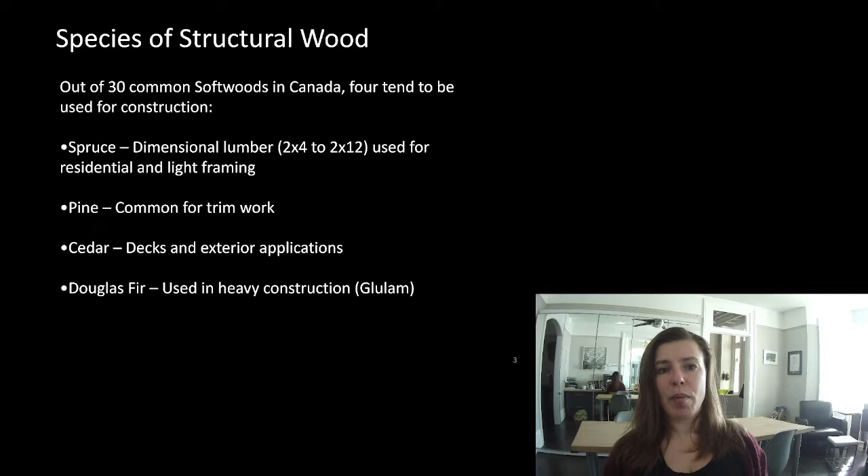We then, I'm going to add this to a wood properties chart I uploaded for you. Add other wood property. Actually, I'm going to pause this for just a second and come right back to you.

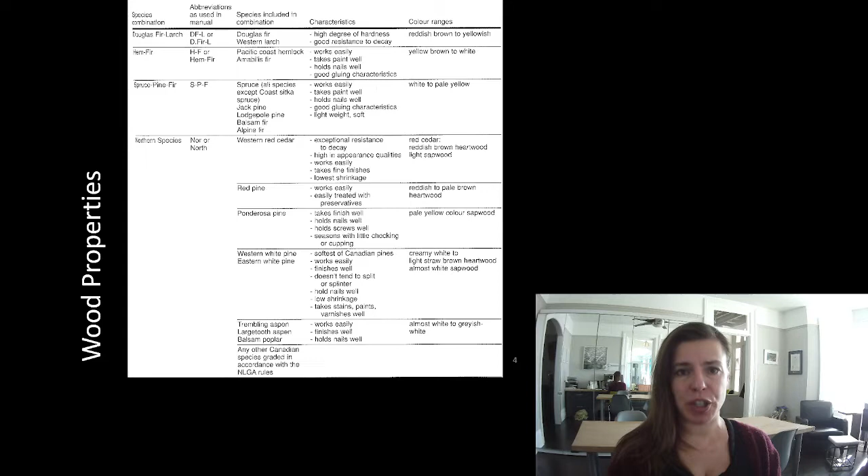Okay, so how do we group these pieces of wood? So you can imagine if there are 30 different softwoods that we can design with, keeping track of that is a big number. It still gets a little bit difficult because remember, I've already said wood is different in each direction, and now we've got 30 different types of wood that we commonly design with. So what they've done is they've broken them into sections of common types of wood. It's still a lot to work with, but it's a little bit better.

We have 4 different common groupings of wood. The first one is DFL, or Douglas fir larch. We have hem fir, spruce pine fir, or SPF, and northern species. So you'll often see nor or north.

SPF is the most common, the spruce pine fir. If you go into Home Depot and buy a 2x4, it's probably SPF. Unless you're building a deck and you're building it out of cedar. If so, it's a northern species, so cedar lumps into this category. Most other stuff lumps into this.

Hemlock, the only thing I've really designed with hemlock has been a dock. It behaves really well in a water situation, although I do know a couple architects working with hemlock right now. They're getting it directly from a mill, and they're doing it on some really cool interior spaces. The Douglas fir tends to be used in glulam.

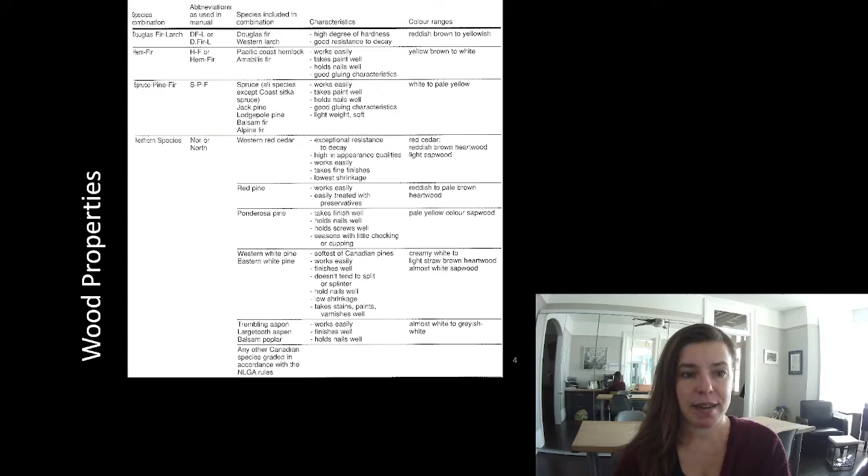Now, we're going to jump around with these a little bit because the process is the same that I'm about to show you. But for the most part, SPF is the most popular. Probably 95% of the construction material we use is going to be SPF.

If you look at a cross section of a tree, the outer bit is the bark, which is the protection of the tree - that dry, crusty stuff. Inside you have what's called the inner bark. You don't have to memorize this, it won't be on a test, but it helps you understand what's going on with trees and why we have certain design factors I'll show you in a little bit.

Springwood tends to be really fast growth, and in summerwood the tree slows down, then stops growing in fall and winter. That ends up creating very distinct rings in a tree. Most of you have heard you can count the age of a tree by its rings, and that's true - you can see a full year of growth quite easily on the interior of a tree.

The interior stuff, the heartwood, is the older growth, and this exterior growth is the sapwood. It's called sapwood because that's where the sap flows, bringing energy from the ground up to the leaves and vice versa - that's how it transfers things throughout its system.

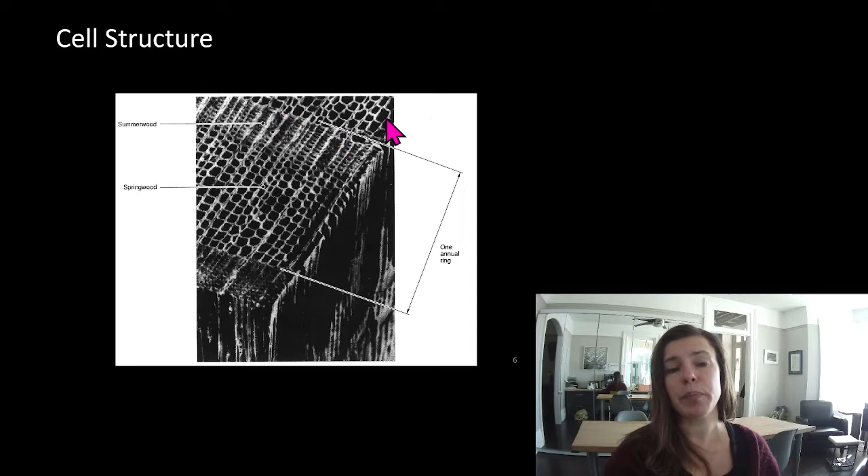So those are just some things to think about. In a few slides I will talk about the factors we use to design with wood. Before we jump into that, I just want to remind you what's available with wood - what materials are we using, what things are we talking about?

So, nominal or dimensional lumber - this was a slide I showed you guys last term. I know some of you in the advanced placement class didn't get the benefit of that, so this is hopefully a refresher. The idea is you should have a grasp of most of this.

Our 2x4s, 2x6s, 2x8s, 2x10s, 2x12s, and 4x4s are not full size. A 2x4 is not 2 inches by 4 inches - it's 1.5 inches by 3.5 inches, or in metric, 38 millimeters by 89 millimeters.

So yes, we will convert back and forth a little bit, because in Canada a lot of residential drawings still show up in imperial. I know we're a metric country, but that's a carryover that hasn't made its full change yet. And so a 2x10 is 1.5 inches by 9.25 inches.

We use these for joists and studs - that would tend to be your 2x4s and 2x6s for studs, and a 2x8, 2x10, maybe even a 2x12 as joists.

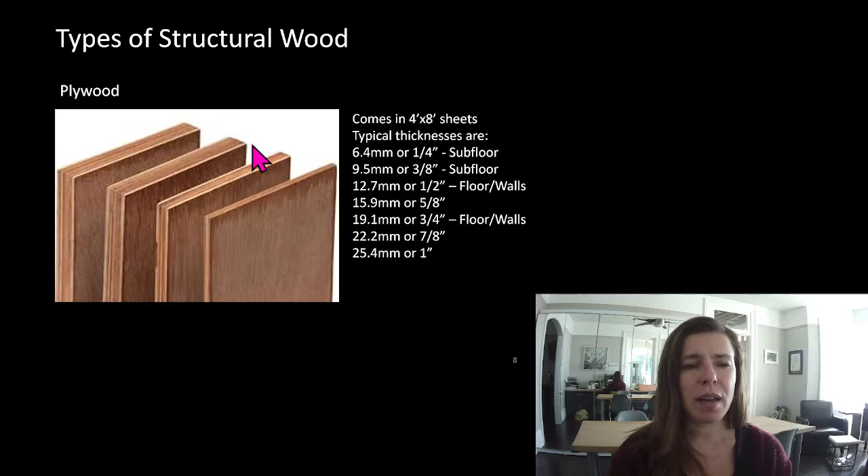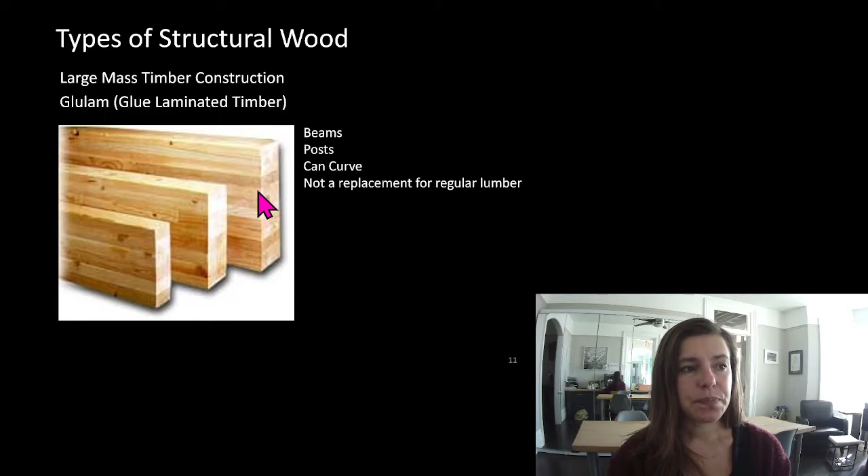I joists, we're not really going to get into designing these, but these would take the place of joists. Our PSL or LVL are engineered lumbers. We're not going to be doing anything with these right now, but I just wanted to remind you they exist. Last term, we talked about using these with sizing guidelines. And then we can have mass timber construction with glulam elements. And then everybody's favorite wood star right now is CLT, or cross-laminated timber.

Now again, this was just a quick refresher to remind you of these different types of wood. Mostly right now, we're going to be designing with nominal lumber—so that means the 2x4s to the 2x12s and 4x4s, maybe even a 6x6 thrown in there. Because the process is the same for the other types, and I need to go through one of them in detail. If we do all of them, I don't have time to do any of them in detail, so I prefer to teach you one rather comprehensively.

So what could make wood harder to design than steel? Well, it has moisture in it. We go cut down a tree and that sap oozes out of it. It shrinks—so even once it's dry, it tends to shrink somewhat. That's all of those long, skinny cells in it kind of shriveling up.

It's non-isotropic. Remember, isotropic means it's the same in every direction—non-isotropic means it's different in the different directions. Those same long, skinny cells—squashing them this way is different from squashing them this way.

It's imperfect—so we can have knots in our tree. Where a branch comes into the side of the trunk of the tree, we can have a flaw in our material there. Those checks and rays that we saw in the cross-section of the wood can also cause flaws in our piece of lumber.

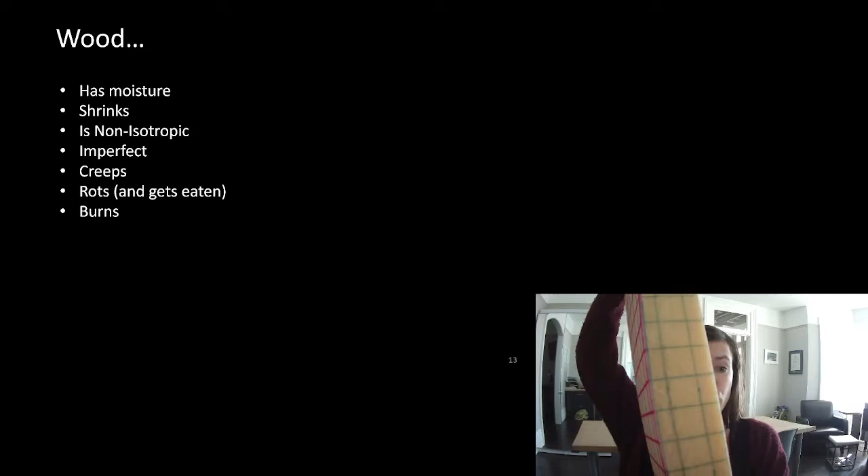Remember, with steel columns, we knew that if it was really short, it would squash. If it was really tall, it would buckle. If it was somewhere in between, it was some combination of squashing and buckling. Wood is the exact same—we have those exact same problems that we have to deal with.

But now we also have to deal with these other problems. So here's what we do: we create factors that we go through to determine the strength and the stiffness of the material we're designing with.

So the first thing we have to do is figure out what type of wood we're using. Then we have size factors—the size factor is about determining the odds of a flaw being inside our material. There are system effects: how are they behaving relative to each other? Load duration—this is about that creep factor. Service conditions—is it wet or dry, which means will it rot? Chemical preservation—treating it against moisture or fire retardant. And then we have the one factor we worried about with steel, which is lateral stability, or buckling.

Out of all of this list, we know all of this for steel—it was just 350 MPa steel. That was easy peasy, we didn't have to worry about more than that, and then we had to worry about buckling. Well, for wood, we have all of these factors that we have to add into it.

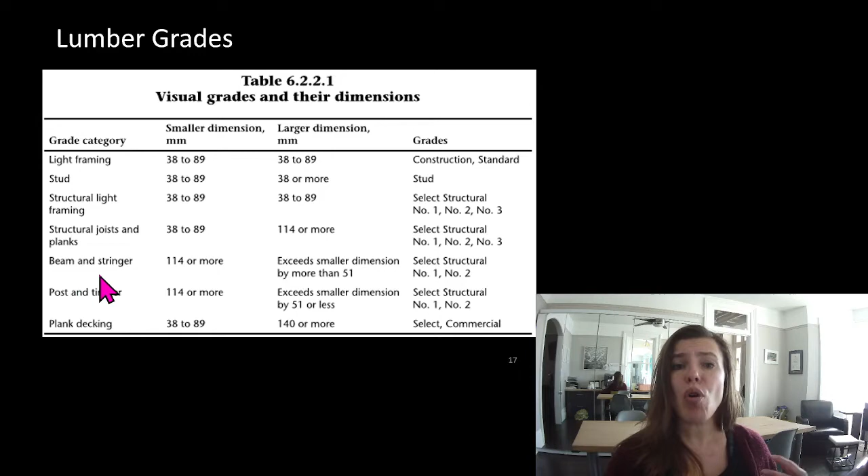With knowing this, we can figure out what grade category we have. Now, why do we need to know the grade category? Well, the grade category tells us what properties our material has - so these all have different load tables or property tables that are assigned to it.

So here's our very first one, table 6.3.1a: specified strengths and modulus of elasticity for structural joist and plank, structural light framing, and stud grade categories of lumber. So if we were any of those things on this table - stud, structural light framing, or structural joists and planks - we could use this table. Look at this: Douglas fir, hem fir, spruce pine fir or SPF, northern, which would be cedar. And then here we have our grade: select structural, number 1, number 2, number 1, number 3.

Look at this - bending at extreme fiber. Well, bending at extreme fiber means here and here. They're not talking about FY. Now, wood is brittle, so we don't have FY - this does not yield. So we care very much about what happens at this and this point in bending. If we start to fail here and here, the whole thing's done. It is a brittle failure.

So the extreme fibers, remember in a rectangle, we did that whole derivation of what happened to the stress profile. Well, if we hit that maximum load, if our extreme fibers exceed this stress, we got a problem. It's not going to work. Anything below this, we're good. We don't care if we are less than this. We care if we go over this. So if we're going to determine something, we might as well talk about it right at that limit.

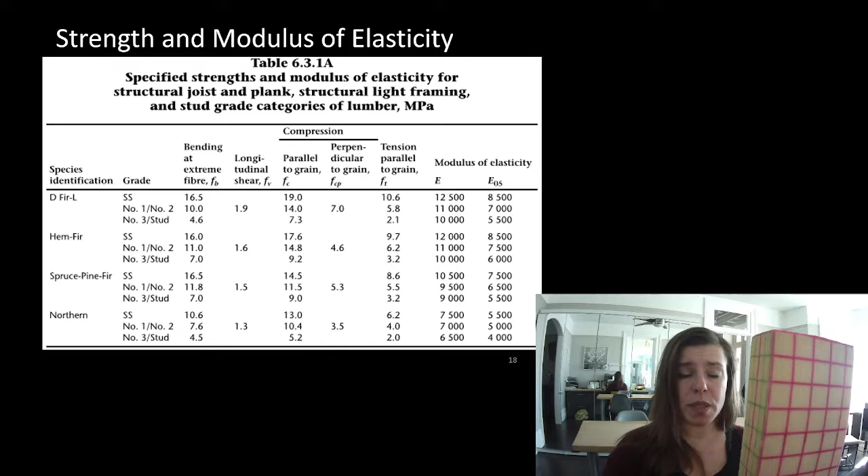But look at this, we have not just FB, we have compression parallel to the grain. Remember all of those tubes, or those straws if you wanted, those cell tubes? Imagine those are all running up the tree. Now we're going to cut it into pieces of wood and we're going to squash it. Our load is acting parallel to those tubes. Load perpendicular to grain is if we're trying to squash those tubes. Most of the time for columns, we're going to be talking about compression parallel to the grain.

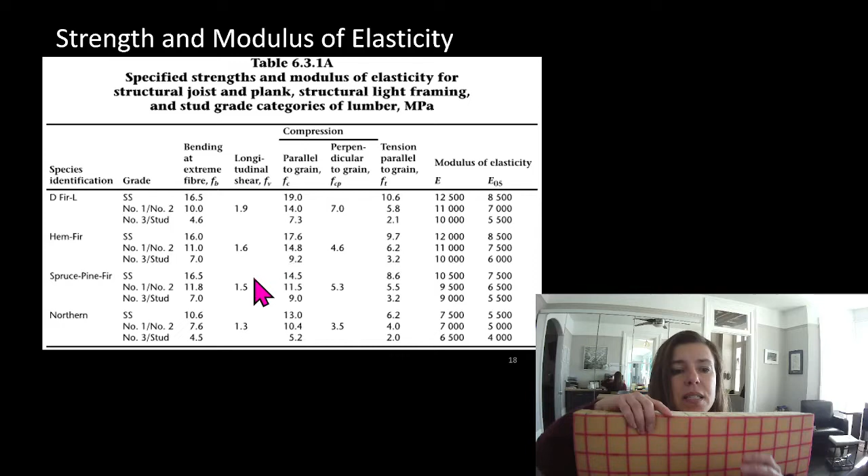And then look at this, longitudinal shear. So that is a shear trying to transfer along our plane here. So we have 3 different categories for our strength, or our maximum stress we want to see, broken out into different grades, broken out into different species.

For steel, we just had 350, maybe 345 if it was a hot rolled section, and that was the limit of it. We had one number we needed to worry about, whether it was in compression, whether it was in bending, or whether it was in shear. Already we have all of these. But wait, there's more, we have other grade categories.

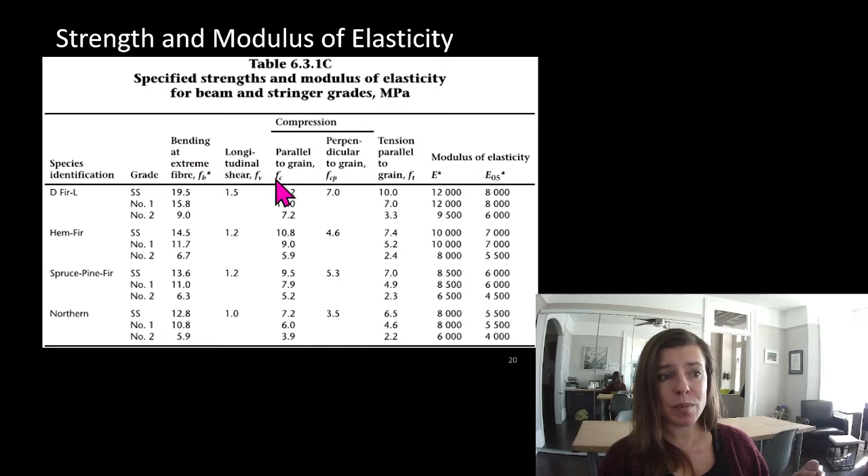This was just our first table. Don't worry about this one, we're not going to use table B. These are the ones that are machine graded. Let's go to the next one. This is the one for beam and stringer grades. Look, we've got all of our species identifications, our grades, and then we have all of our different maximum stresses we can see. And then we have table D, which is for post and timber grades.

So we went from having one grade for steel to having, God, how many? 3, 6, 9, 12, 24, 28 times 3. So almost 90 different strength possibilities for our wood.

They also list here modulus of elasticity, so we have E and E05. Don't worry about this, this is just talking about the 5th percentile of something occurring. Basically if we were talking about distribution and we bound it, we're going to cut out a portion of these values, so basically we build in a reduction to our modulus of elasticity. Imagine that there was another load factor that we already built in. Depending on whether we're talking about strength or compression, we use one of these two things. It'll be very clear when we look at the equations which one of these we need to pull out to do our work. So that's our strength and modulus of elasticity.

That's a lot of information, but we haven't even talked about our factors yet. We have more that we have to do here. So we would go figure out what our strength is, but then we need to modify it based on its specific condition. So that's what they go cut down in the woods that we can go buy at the store. But then what are we doing with this thing? That can have an impact on how we treat the strength as well.

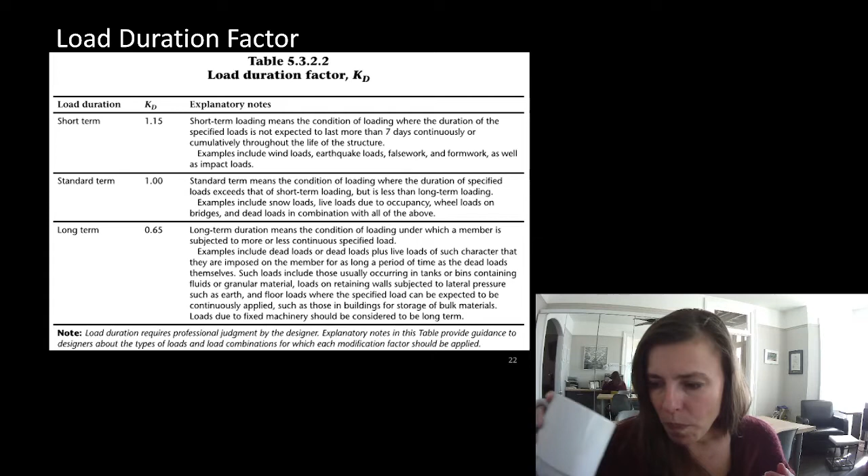So the first one is the load duration factor. The load duration factor says, well, this is basically accounting for creep. If something is sitting on this for a really, really long time, it can cause some creep on it, which can reduce its strength capacity. If it's a short-term load, like a really fast load, we actually get to say it's stronger than we typically would.

Now standard term is, you guessed it, going to be standard. I think I have one question on the assignment where you wouldn't use standard term. Everything else we do is going to be standard term. So unless you hear otherwise, always use 1 for KD. Just use 1. If you hear somebody say short term or long term, then come look at this table. But you would very distinctly have those trigger words from me, you would hear me write or say short term or long term. So standard term means the condition of loading where the duration of specified loads exceeds that of short-term loading but is less than long-term loading.

Yeah, what an obvious statement. Examples include snow load, live loads due to... oh, Jesus.

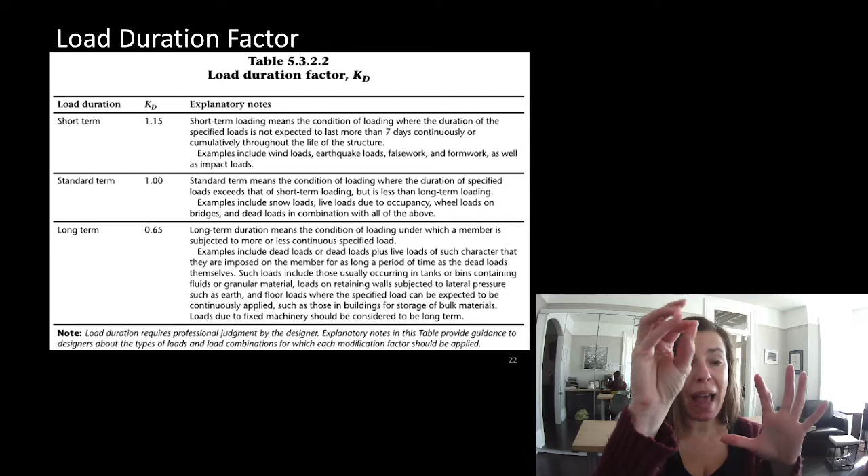We have the kids' bath toys in a basket attached to the side of the shower with a suction cup, and it just came crashing down. I'm in the house for the first time by myself in forever, so that really caught me off guard. I apologize, that startled me.

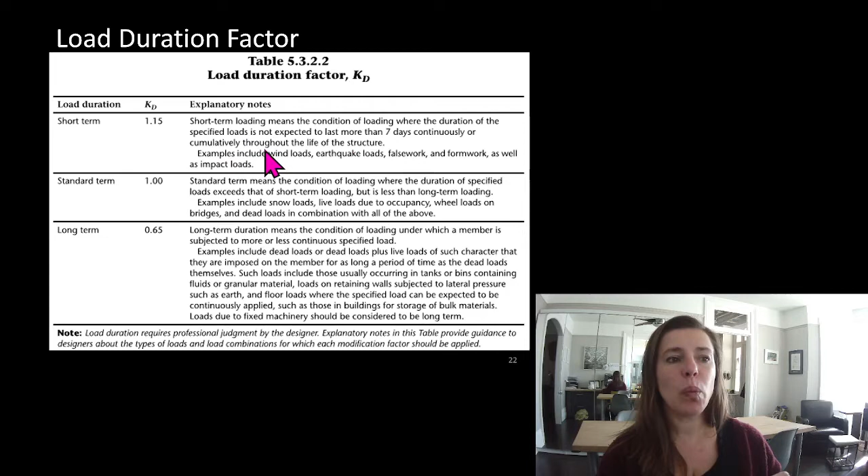Jiminy Cricket, okay. So, snow loads, live loads due to occupancy, wheel loads, and dead loads when combined with something else - if a dead load is combined with these, which is most of the time. One of the interesting ones is wind. Wind and earthquake are considered short-term loads, but most of the time for wood construction, we're talking about live load and snow load.

System factor - this one, for whatever reason, always screws people up: if it's not part of a system, people try to use 0. Don't do that. If it's not part of a system, its factor is 1. What this says is if it's part of a system, we can say it's stronger than we think. So what does being part of a system mean? Essentially, if we have things close together that have the potential to share the load, any one object is getting the benefit of the things adjacent to it.

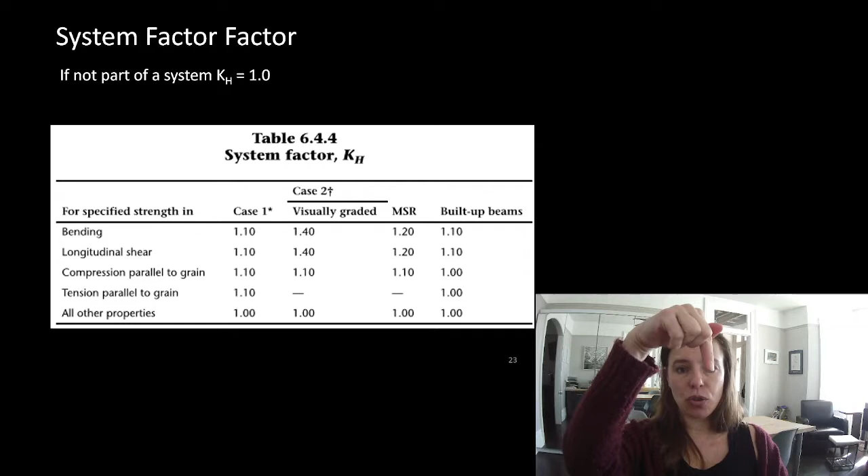So imagine you're building a deck and you don't have the top of the deck on, but you have all of your joists on it, and you stand in the middle of one of those joists. All of your load is going to go on that one joist, right? Well, what if you get off and then put the decking across all of the joists? And now you go back and stand directly in the same spot, over one particular joist. All of your weight is on one joist, except you're standing on top of the decking.

If your weight pushes that joist down, it pulls the deck along with it. And for the deck to go down, it has to try to bring the joists beside it down just a tiny little bit. Meaning, by activating the middle joist, you're engaging the joists on either side of it by the fact that it's got the deck on it. And that is what accounts for a system. If it's a post or a beam, it's not part of a system and its factor is 1.

If it's a joist or a stud, it's probably part of a system. So those are your trigger words right there. Joist, stud - you can be pretty certain it's going to be part of a system. If it's a beam or a post, you can be pretty sure it's not going to be part of a system. Now, there are very specific clauses for when it's case 1 and case 2. I'm going to tell you that most of the stuff we do is going to be case 2. A normal house, which is a normal thing, would be case 2, just the way they build things.

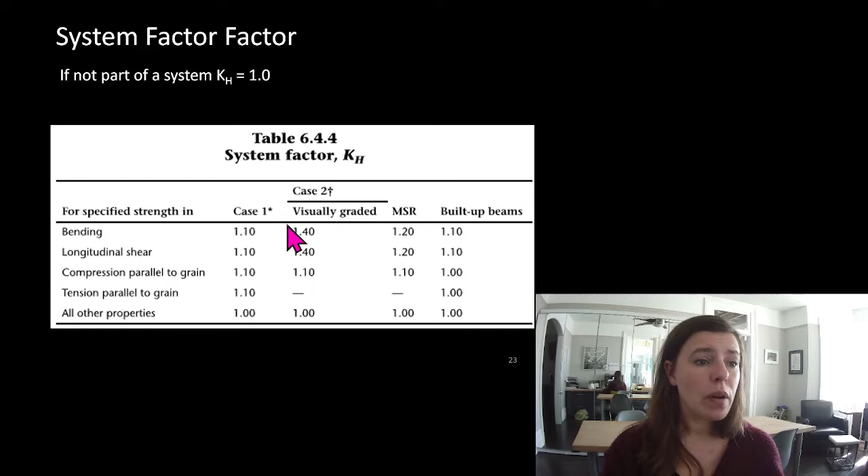So they say here, joists and rafters sheathed with plywood, a minimum of 9.5mm, with panel coverings - basically a normal floor construction. If we've got that, you can assume case 2. So if you see me say 'kind of a normal building,' you'll know I'm saying case 2. If you see stud or joist and normal construction, you'll know it's a case 2 system factor. So look at this, system factor: case 1, we're not really going to use that much unless I explicitly say it's case 1. Case 2, here are our system factors.

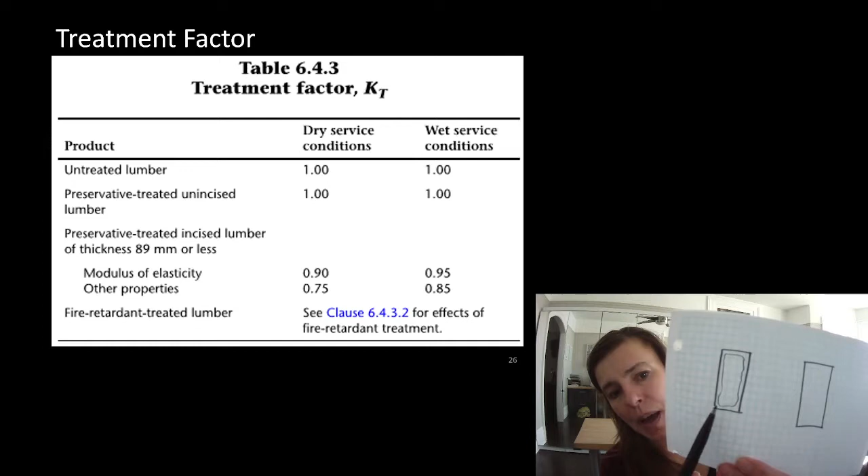If you've ever cut pressure treated lumber, it tends to have a color variation that looks like this. The outside is treated and the inside isn't. If you make a cut, we often buy a seal coat or end coat where you just brush it on the end to add some pressure or preservative to that end cut of our piece of lumber.

Incised lumber, they basically go around with, think of it as like a dimple maker for pasta or something like that. It basically punches little holes in the lumber, like that. So when it goes in the pressure treating bath, our pressure treatment goes a lot further into the lumber.

I have never seen a 2x4 or a 2x6 that's been incised ever. 2x8s, it seems to be whoever is the supplier. I've bought pressure treated 2x8s that are incised, and I've bought ones that aren't. 2x10s and 2x12s pressure treated are almost always incised, and you can tend to see them, it looks like they have staple marks all along the outside of them.

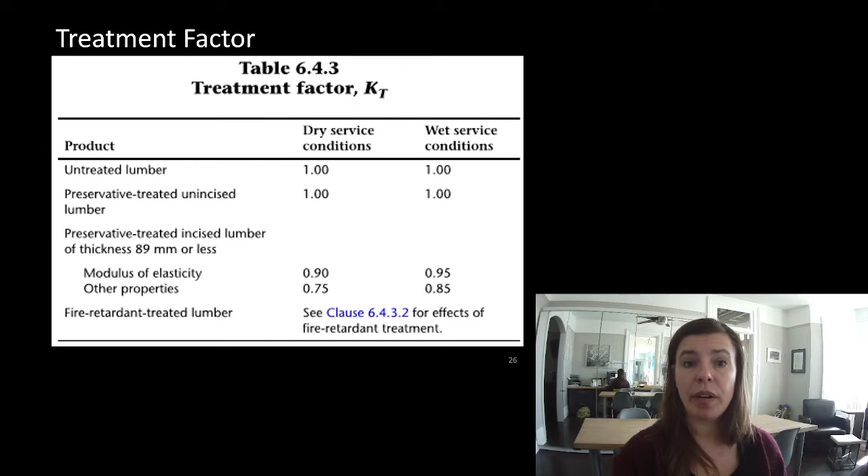Fire retardant treated lumber, there's a special clause here for that. I can tell you I have never done fire retardant on my lumber. I know Dave has been doing it for a lot of the mass timber projects they're working on now, but it would be a special class of building to be doing that.

Size factor. So the size factor, you would think that the smaller the lumber, the more you would reduce its size factor, or the more you'd reduce its strength. It's counterintuitive. It's the exact opposite.

The size factor tells us that, remember where we had the trunk and the branch coming in? Well, if we're cutting a small piece of lumber, remember we're grading these with our eyes. We look at the outside of it. We can't see what's happening inside. A small piece of lumber probably shows all of its flaws on the outside. If there's a knot inside of it, there's probably a portion of it that you can see on the outside.

As our piece of lumber gets bigger and bigger, the odds of there being a flaw hidden inside it actually increase. So if you have a member this big and a knot this big, you'd see it. It would be pretty obvious and it would be graded accordingly. If you have a member this big with a knot this big, it could be hiding right in the middle of the lumber and you wouldn't know. So as the size increases, we actually reduce the capacity.

For small members, we're so confident that the flaws have been taken into account that if you've got a really good looking piece of lumber with no flaws on it, we say, you know what, we're actually going to bump up the strength on that. And so that's what our size factor is.

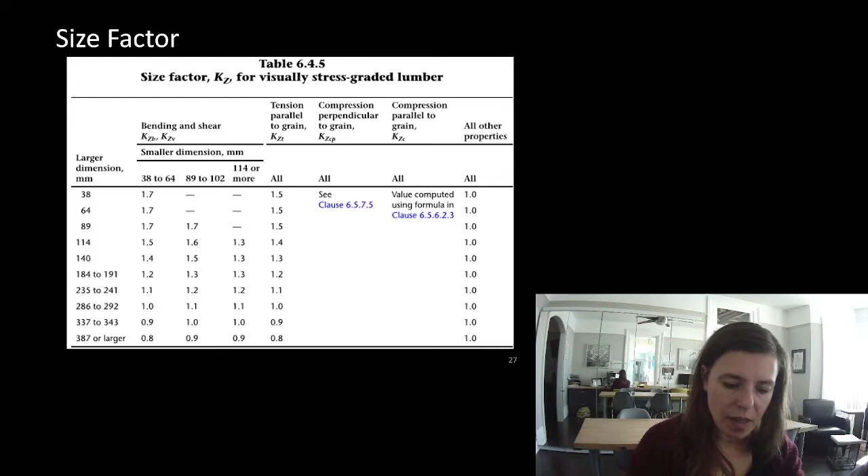Interestingly enough, for built-up sections, we get to use the size factor for individual members. So if we had these same two pieces of lumber, this would reduce its strength because it's one big thing and the knot could be hidden in here. But 4 pieces of wood screwed together, one big knot would be visible, and it already would have been accounted for in the fact that it was select structural versus number 1, number 2 versus number 3 versus stud. So built up sections, we can use the actual individual member size to determine our size factor.

All right, compression design. This equation doesn't look so bad. It's not scary. It's not as ugly as our steel one, right? We have our reduction factor here. Sorry.

We have our reduction factor of 0.8 for wood in compression, capital FC. They've given us an equation for this, with small fc and a bunch of our factors. Small fc is the specified strength or stress in compression parallel to the grain.

That's from those first tables we looked at, whether it was table A, C, or D. Remember, was it joists? Was it structural light framing? Was it post and timber?

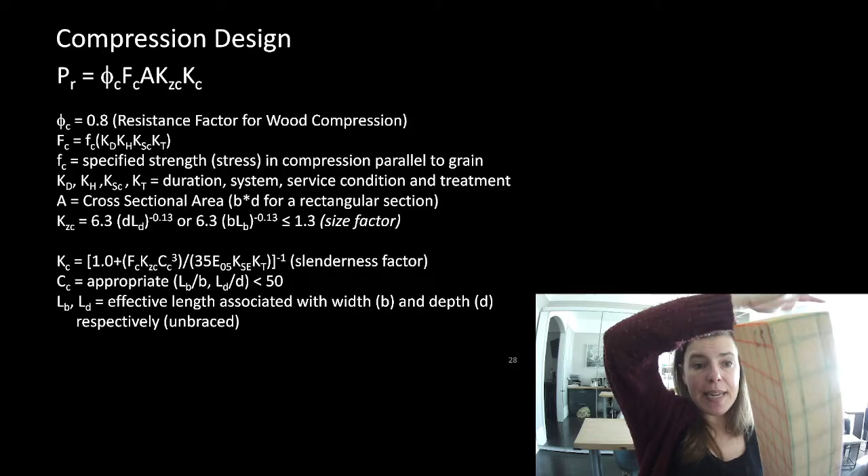So if we squashed it, it was pretty obvious that it was going to try to buckle in its weak axis. Remember, we were very worried about IYY for buckling, but IXX for strength, for bending, for stiffness, for deformation. Remember I showed you what happens if we just put our finger here - it changes our unbraced length to that dimension.

Well, wood is interestingly often embedded within other things - we often have plywood attached to it. So what we're saying here is we don't know what direction it's going to try to buckle, so we have to think about both directions. LB and LD are our effective lengths associated with each direction.

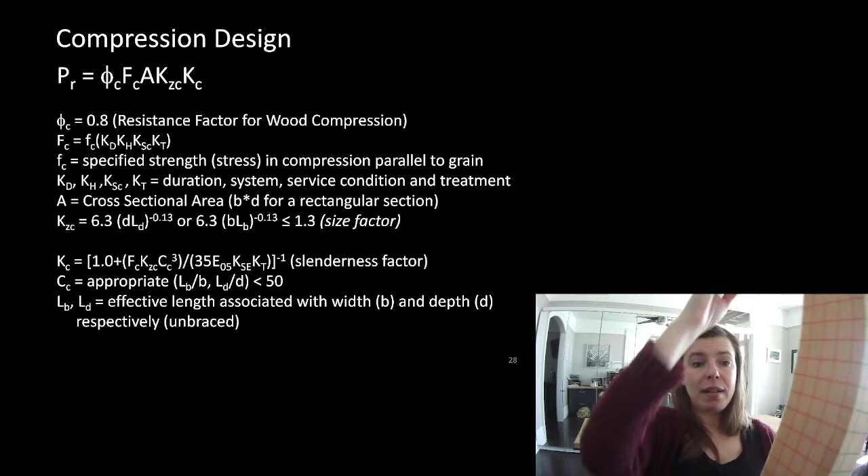So in this version, the unbraced length is the same for trying to buckle it in that direction or that direction, and you can tell at a glance that LB and B are going to govern it. But look at this - if I brace it here, we now know that its unbraced length is this in the strong direction, but half of that for the short direction. So it's probably still pretty obvious which way it's going to go.

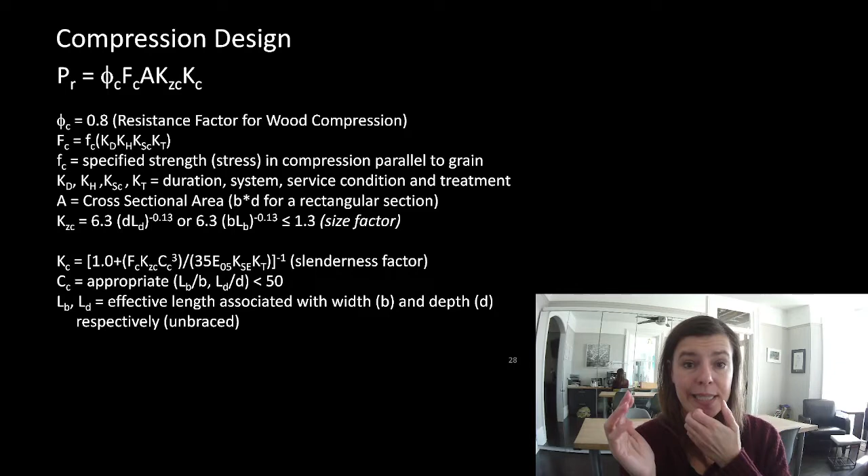What if I said this was in between something and it couldn't buckle at all in the weak axis? Well, we don't know when it'll try to buckle in that direction, but that's the direction it could try to buckle because it can't buckle in the weak axis. It might be governed by strength, but it might be governed by buckling in its strong direction.

So we have to think about its strength, buckling in the weak axis or buckling in the strong axis. That tells us which one to use, and then we use the appropriate size factor in that equation. So basically we're going to track two things. Sometimes it'll be obvious right away which one governs and we won't even need to bother with it, but most of the time we'll track both, and it'll become obvious as we look at some of these.

Let's look at the two different equations for steel and wood. For wood, it's PR, which is just another way of saying compression resistance. Why did they pick a different symbol? Who knows - the people doing the wood code weren't talking to the people doing the steel code, so they used different symbols for things.

The important thing is that they are very similar equations. It doesn't look like it, but look: they both have their reduction factor, they both have their cross-sectional area, and they both have the maximum stress we want to see in it for compression. For steel, it happens to be Fy because it's isotropic, but for wood, it's the compression parallel to the grain.

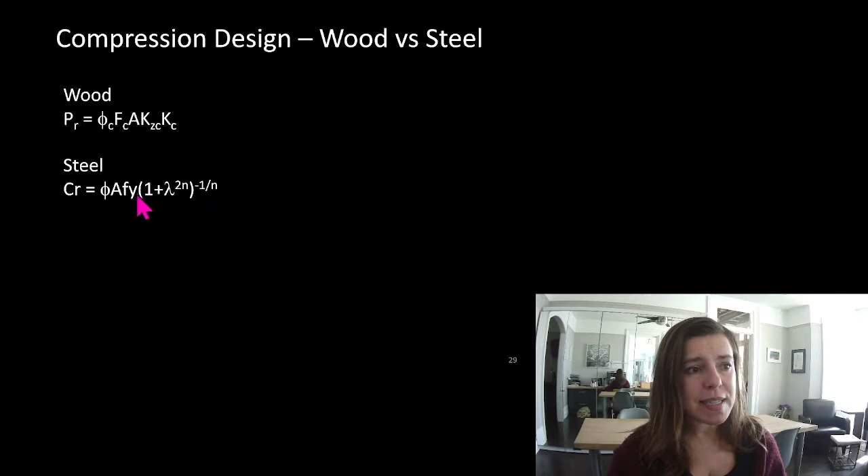We've built in some factors into this. Then we have KZC, which is just another factor, and KC, which is our buckling factor. KC, remember, was 1 plus a bunch of stuff to the power of negative 1, so KC is very similar to this portion. Really, what we're saying for both equations is we have a reduction factor, the maximum stress we want to see, our cross-sectional area, and then some factors for the material and for buckling. They are essentially the same equation - they just look a little different.

So we're going to follow the same process I always talk about, where we look at everything we know and see if we can solve each individual element of the equation before we plug everything in. Don't get overwhelmed by the big overall equation - stop and look at each individual thing within it, get as much information as you can, and then go back and try to solve it.

So let's look at how this plots out for a given element. Remember for our steel column, when it was really short it was governed completely by squashing, and when it was really tall it was governed completely by buckling - to the point that if it was tall enough, we said we don't even care how much capacity it has, we won't even let ourselves load it in that condition. In between those two extremes, it was some combination of squashing and buckling. Well, it's the exact same thing for wood.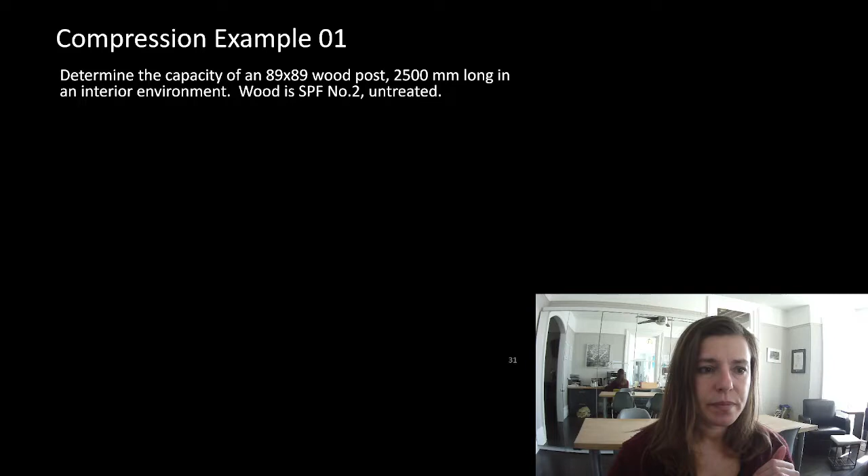Okay, the fun stuff. The very first example we're going to do is to determine the capacity of an 89 by 89 wood post. That's a 4x4 - remember, 4 inches by 4 inches is actually 3.5 inches by 3.5 inches. So we've got an 89 by 89 wood post, 2.5 meters long, in an interior environment.

So we can deduce some things from that, but we'll get to that in a minute. The wood is SPF number 2, untreated. So they're going into the store and they know they're just going to buy SPF because that's the most normal thing, especially inside a house. And it's untreated because why would you treat it - it's inside a house, we normally treat wood for outdoor conditions. Okay, so we want to figure out what the capacity of this member is.

So let's make this big. All right, so we want PR of - let's see if I can get this a little closer - PR of an 89 by 89 post, 2,500 millimeters tall.

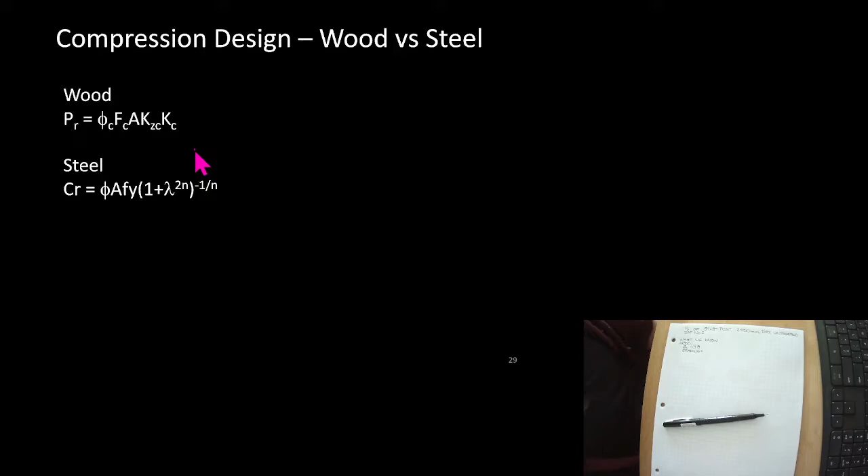Grading. We don't know what the grading is, we have to figure that out. So let's come down here. Let's go back to that table that had the grading in it. Okay, we want to know what grade category we are. Here are the different grades. So we know that we have number 2 lumber, so it can't be this, it can't be this. So it could be any of these. So we could come over here.

It's in this category here. The smaller dimension is 89 millimeters, so it could be either of these two categories. It's under 114, so it's not these ones, so it's gotta be one of these two things. The larger dimension was only 89 millimeters, it was square, so it can't be this. It looks like our grade category is structural light framing. So I'm just gonna write that in here.

So, structural light framing. Well, with structural light framing, we know we can get a bunch of information from a table, we just don't know what table. All right, we have structural light framing. Oh, look at this, structural light framing, we get to use table 6.3.1a. Well, we were told that we have SPF lumber, and it was a number 2. Okay, we know we're talking about something in compression parallel to the grain, so it looks like we can come over here and we can get a bit of information.

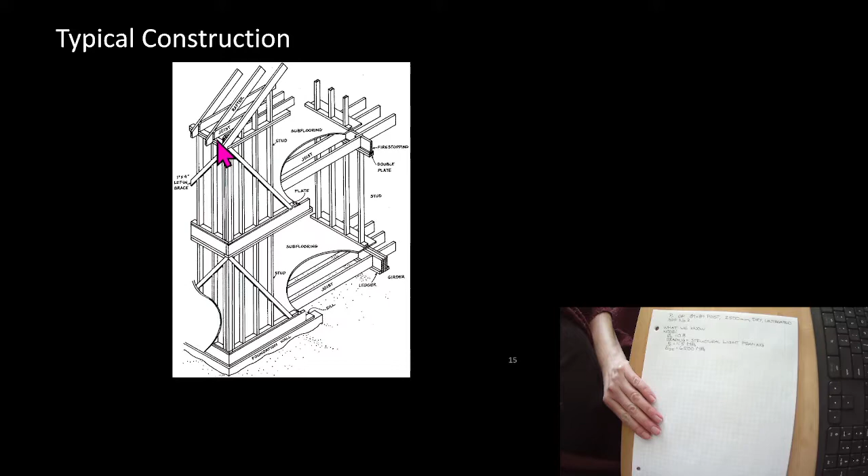Okay, well the first one, so these are our factors. KD. Well, they didn't tell us what loads were on it, but it said it was a pretty normal house. And remember I said, unless I told you something pretty specific, we're gonna be standard term. So standard term, KD, is 1.

That's nice and easy. All right, system factor. This said it was a post. When did I say right off the bat? You know what, I'm even gonna add this to slide 23. Post beam, I'm just gonna put a little note there for you guys just to really lock it in. So if it's a post, it's not part of a system because it's not sharing that load out with anything. So if it isn't part of a system, its KH is 1.

All right, let's go to our next factor. Service condition factor. We know there were a few things we could look at here, and we're talking about compression parallel to the grain, and we know we have a modulus of elasticity that we've pulled, so maybe we should get these two, so KSC and KSE. Let's see. Well, it said it was inside. To me, inside means it's dry, it's going to be protected from the elements, it's going to have an envelope around it. So everything is a factor of 1 if it's dry. So 1 and 1. Okay.

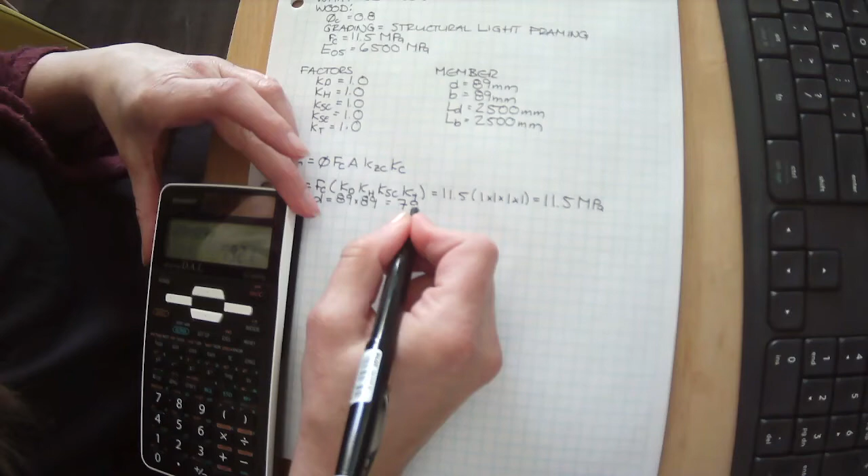This seems kind of boring so far, seems like we've done a lot of stuff but haven't really done anything at all. But now we have FC. Area, well we know area is B times D, so we can calculate that. 89 times 89, let's figure that out. 89 times 89 is 7,921 millimeters squared. Okay, we've got our area now.

KZC. KZC is ugly. KZC is a big old ugly equation that is 1 plus capital FC... oh sorry, never mind, I'm reading one step ahead here.

All right, KZC isn't so bad. KZC is 6.3 DL D to the minus 0.13, or 6.3 times BL B minus 0.13. Well we're only going to check this once because D and B are the same and LD and LB are the same. Remember, this is all about its propensity to buckle in either direction. So we would normally, if these dimensions varied, we would check both of these things, but for us it's the same.

It's 6.3 times 89 times 2500 to the power of minus 0.13. So 6.3 times bracket 89 times 2500 to the power of minus 0.13 equals 1.27. Now that is in fact less than... sorry, I'm kind of half talking to myself here. Yeah, it is less than our 1.3, so we're good, we've got a KZC here.

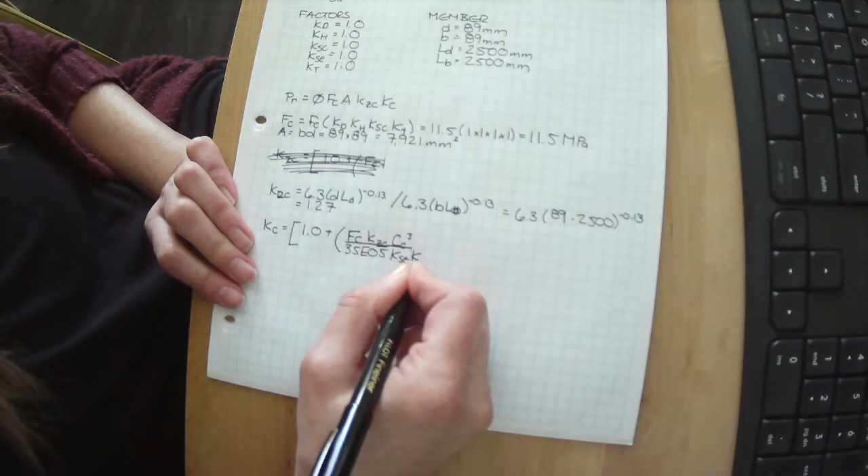Now KC is, big bracket, 1 plus capital FC KZC CC cubed, I always forget that cubed, try to remind me, yell at me, I'm going to forget that cubed, 35 EO5 KSE KT end bracket.

To the minus 1. Okay well capital FC we've already calculated, KZC we've calculated, EO5 we've pulled from a chart, KSE we looked from a chart, and KT. So the only thing we don't have is CC. All right, so CC is either LD divided by D or LB divided by B. Well it looks like these are the same, LD and LB are identical, and D and B are identical.

So we just need to do this once. 2,500 divided by 89. If you're wondering what do I do if these are different, don't worry, we're going to do another example that looks at that, I won't leave you high and dry on that. So 2,500 divided by 89, we get 28.09.

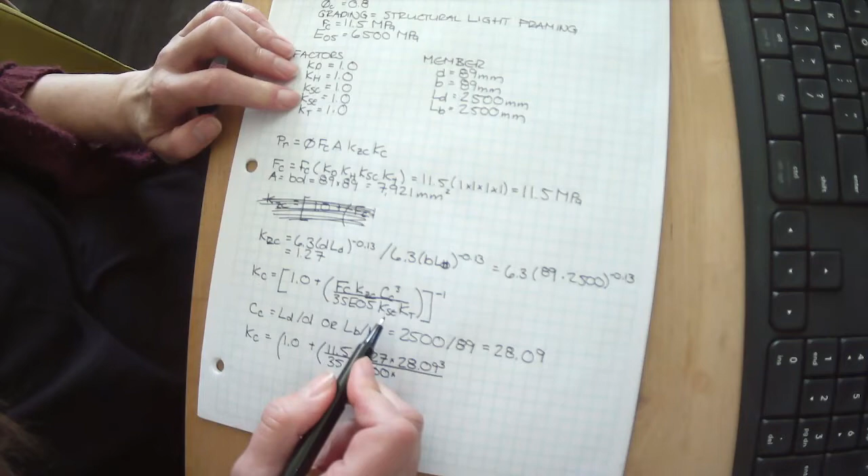That looks like it filled out everything for KC for us. Now we can calculate KC. KC equals 1 plus our FC we've calculated as 11.5 times KZC we calculated as 1.27, that's our size factor, times our CC cubed is 28.09 cubed over 35 times our EO5. Our EO5 we looked up is 6,500 times our service condition factor for stiffness, but it's 1, times our treatment factor, which is also 1. And then end bracket minus 1.

So let's plug this into our calculator. We have 1 plus 11.5 times 1.27 times 28.09 cubed divided by 35 times 6,500 times 1 times 1, end bracket, end bracket, end bracket, to the power of minus 1. And we get KC of 0.4127. Remember, this is our buckling factor. So this is telling us that if this was 1, it's not governed by buckling, if this was almost 0, it's entirely governed by buckling. But this looks like it's somewhere part strength, part buckling.

Okay, so now we have our KZC and our KC. It looks like we can calculate PR.

PR equals our reduction factor, which is 0.8, times our capital FC, which was 11.5, times our area, which was 7,921 millimeters squared, times our KZC, which was 1.27, times our buckling factor, which is 0.4127. All right, let's calculate this.

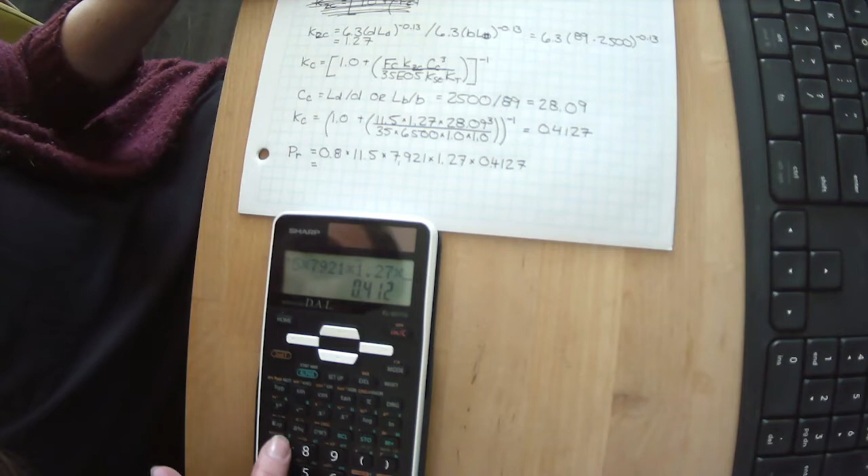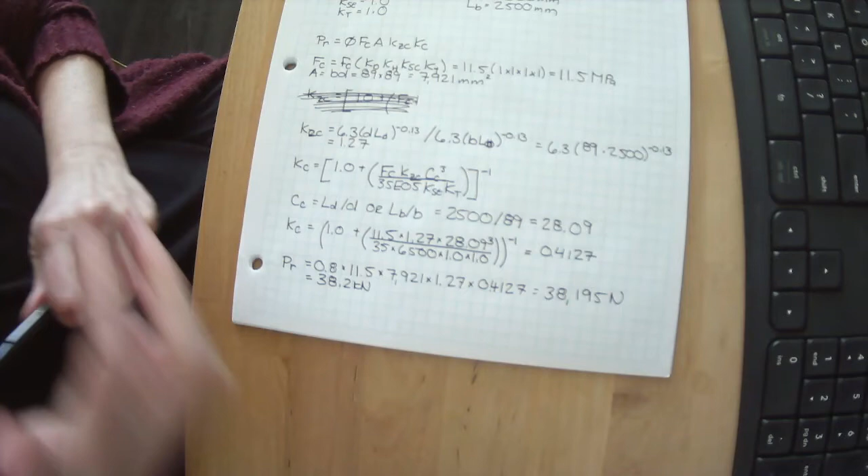We have 0.8 times 11.5 times 7,921 times 1.27 times 0.4127 equals 38,195 newtons. We find it a pain to talk about newtons once we're talking about the actual forces, so we're going to talk about it in kilonewtons now. It was useful to use newtons and millimeters for our calculation, but now we're going to say it's 38.2 kilonewtons. So whatever load is on that column has to be less than 38.2 kilonewtons.

We now know the capacity of an 89 by 89 post, or colloquially a 4x4 post, an SPF number 2, 4x4 post. That happens to be 2.5 meters tall inside a building. We don't know if this particular one works or not because we don't know what the load on it is.

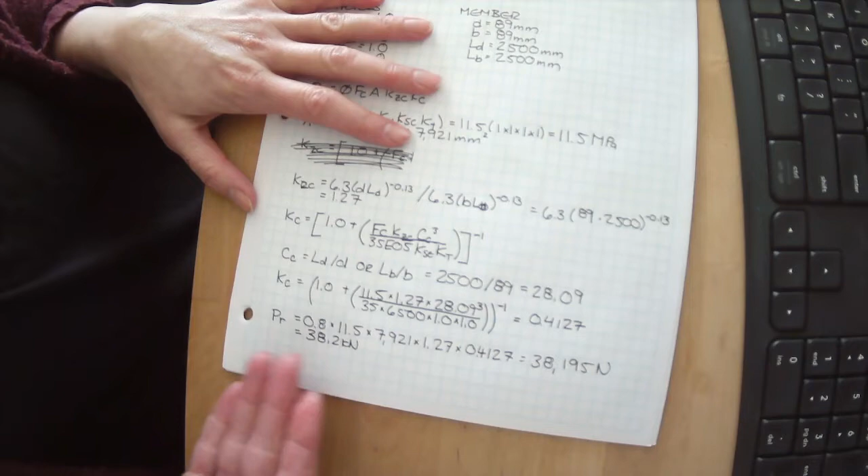Now, I am not completely evil, so I have also given you load charts. There are compression tables that I have provided for you. Let's open this up here first. Oh, where did that go? You little stinker. Here we are. We have posts here, and that talked about being on... sorry, let me get my bearings here.

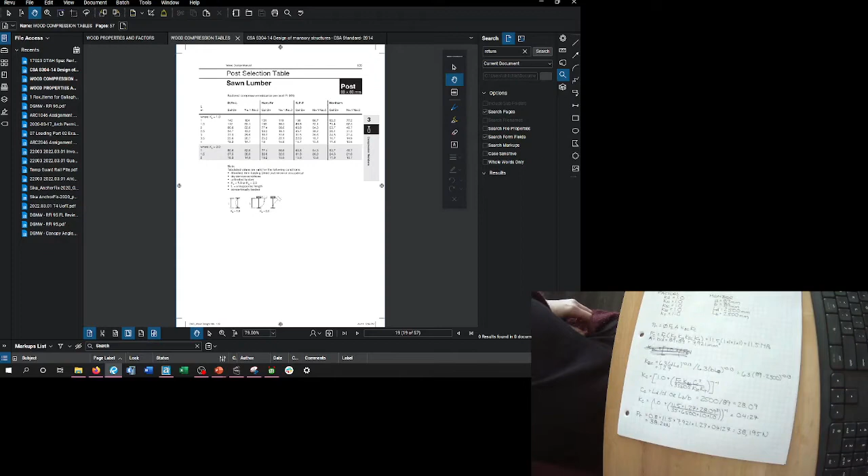So this is sawn lumber. Oh, look at this, post 89 by 89. The length where KE is 1. So basically that's talking about what does it look like when it's deformed. And we're saying that usually we've just got a normal old column that's got a floor above it and a floor below it that's kind of bracing it.

Okay, so where our length is 2.5 meters, and we have SPF number 1 or number 2, we come across SPF number 1, number 2, 38.2. That's exactly what we just calculated. So it looks like we did something right here. Go team. Okay, so here it is in that chart.

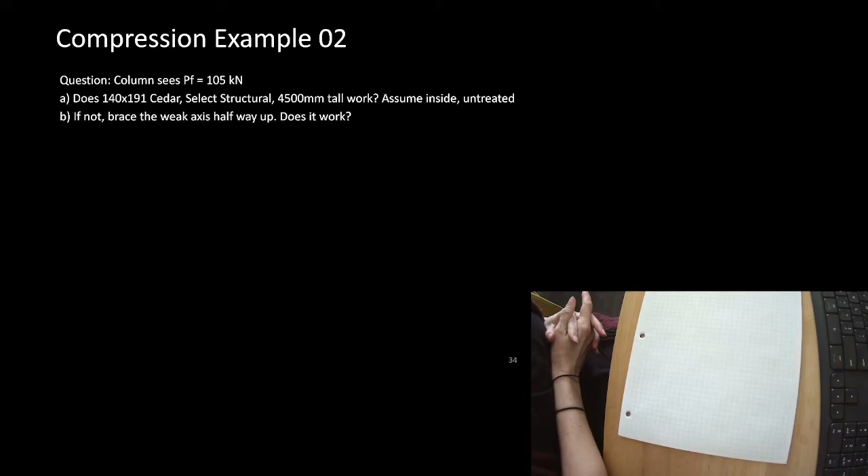Let's do another example. A column sees a PF of 105 kilonewtons. Does a 140 by 191 cedar select structural, 4.5 meters tall, work? Assume inside and untreated. This is one where we're going to look at two different bracing elements. If not, brace the weak axis halfway up. Does it work? Okay, let's take a look at what we know here.

PF equals 105 kilonewtons. We have a 140 by 191 cedar, select structural, 4,500 millimeters tall. It's inside, untreated, and unbraced. B, same as above, but weak axis braced halfway. All right, let's figure out what we know.

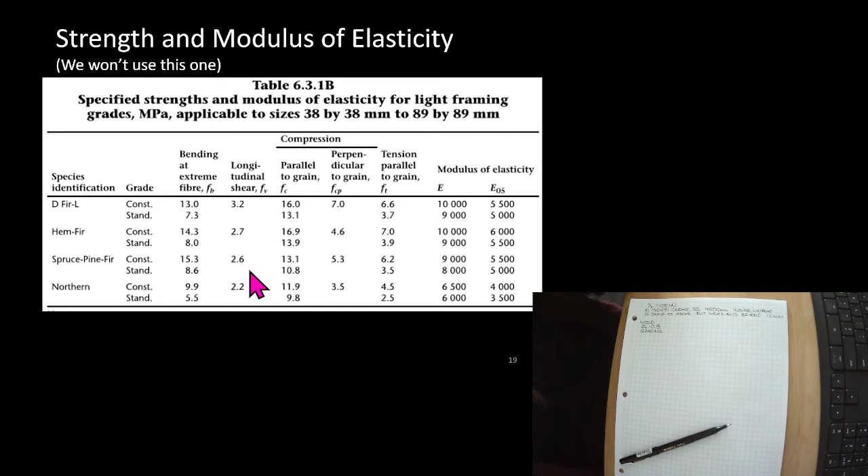We get to use the table that talks about post and timber. So let's look at that. Post and timber looks like it's table D. So 6.3.1D for specified strengths and modulus of elasticity. They told us it was cedar, so cedar is a northern species. It was select structural, they gave us this in the question. And we need to know what the compression parallel to grain is. It looks like it's 7.5 MPa. And EO5, which we know we need to help calculate our buckling, is 5,500 MPa. So 7.5 and 5,500.

All right, so it is post and timber. We have a lowercase fc of 7.5 MPa and EO5 of... was it 6,500? No, it wasn't 5,500... 5,500 MPa. Okay, now we know we have to think about those factors. All right, let's think about factors. KD, it didn't tell us it was anything unusual, so I think we're pretty safe to assume it's a standard term load factor.

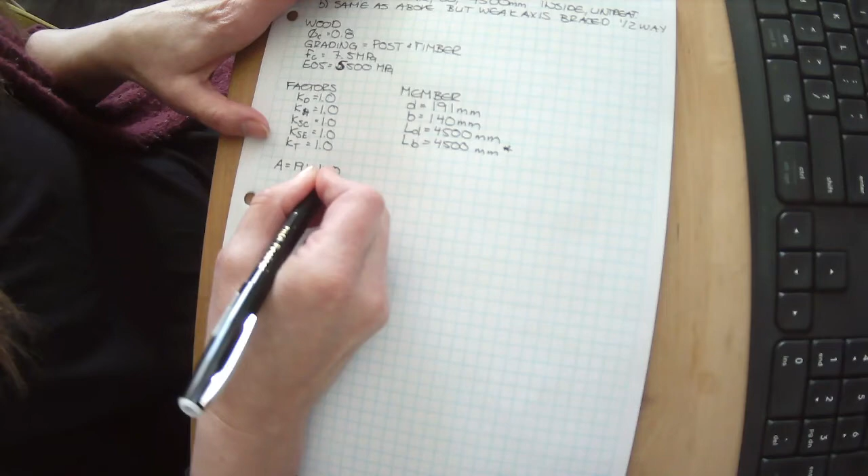All right, area equals 191 by 140. Area is 191 by 140, or 26,740 millimeters squared. All right. Capital FC is lowercase fc times KD times KH times KSC times KT.

Well, we have 7.5 times 1 times 1 times 1 times 1, or 7.5 MPa.

Let's right away calculate our CCD and our CCB. Well, they're not the same - remember last time they were the same? This time they are not the same. So we are going to track both of these. So for CCD, it is 191 divided by 4,500. And for CCB, it is 140 divided by 4,500.

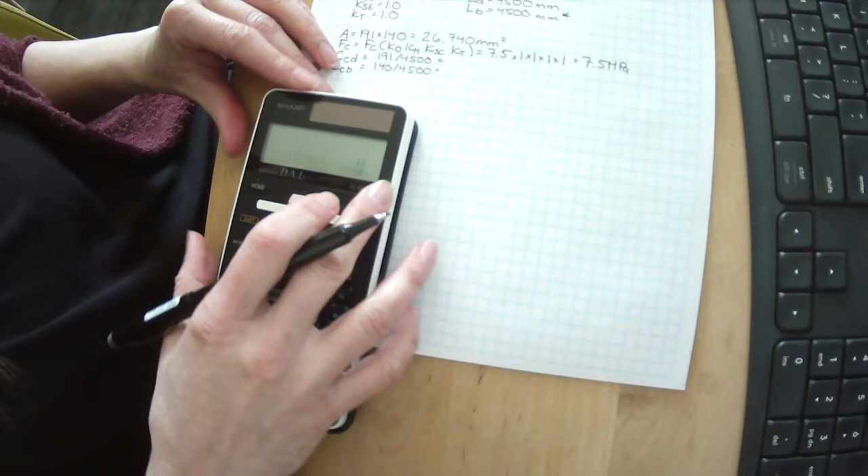But we don't know what the difference here means. So what we're going to do is continue to track both directions of failure here. Sorry, I wrote those backwards, don't mind me. So 4,500 divided by 191 and 4,500 divided by 140. 4,500 divided by 191 is 23.56, and 4,500 divided by 140 is 32.14.

We don't know what the heck that means, that doesn't really give us any information. So now let's calculate our KZC - for D, and KZC for B. Remember, it's 6.3 times 191 divided by 4,500, and that is to the power of minus 0.13. And we have 6.3 times 140 divided by 4,500 to the power of minus 0.13.

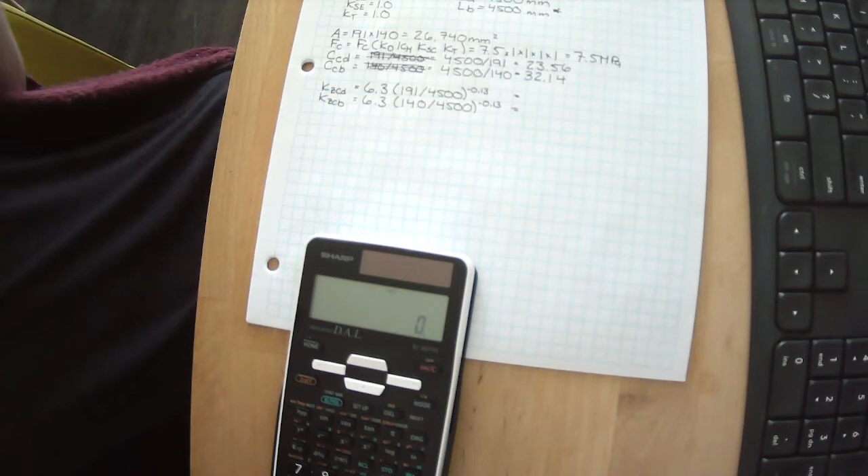So right now we're just tracking both of these things because we don't know which direction is going to govern. Now, you probably have a good guess - if the length is the same for both of these, do you think it's going to buckle in the weak axis or the strong axis? Yeah, my guess is the weak axis is going to be what buckles here.

Okay, so 6.3 times 191 divided by 4,500 to the power of minus 0.13 is - I am not plugging things in strongly into my calculator today, am I? 6.3 times 191 divided by 4,500 to the power of minus 0.13.

Oh guys, I am totally sorry, I don't know what I'm doing here today. I am just totally - oh my God, I did it again, I divided when I should be multiplying. I am really so sorry about what my brain is doing today. Oh, okay, those are big multiplications, not divisions. I don't know - luckily I know that the answers don't look right because I know these should be somewhere around 1.

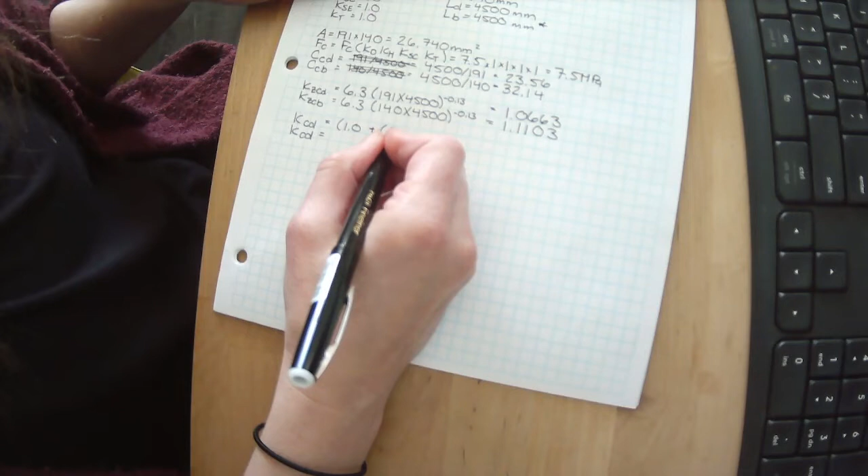So here we have 1 plus our FC, our capital FC is 7.5, times our KZC, and so this one's for D, so it's 1.0663, times our CC cubed, and this is for D, so 23.56 cubed, divided by - why am I doing this in such a messy way? This is really annoying to you guys and to me. All right.

KCD, that was - I didn't like that, sorry. So 1 plus 7.5 times 1.0663 times 23.56 cubed, I always forget that cubed, divided by 35 times our E05, which is 5,500, times our KSE, which is 1, times our treatment factor KT, which is 1, and all of this is to the minus 1.

All right, we need to calculate this for KCB as well, right? We're checking it in both directions, just to be thorough. We're pretty sure it's going to buckle in the weak axis, but we're tracking both of them just in case.

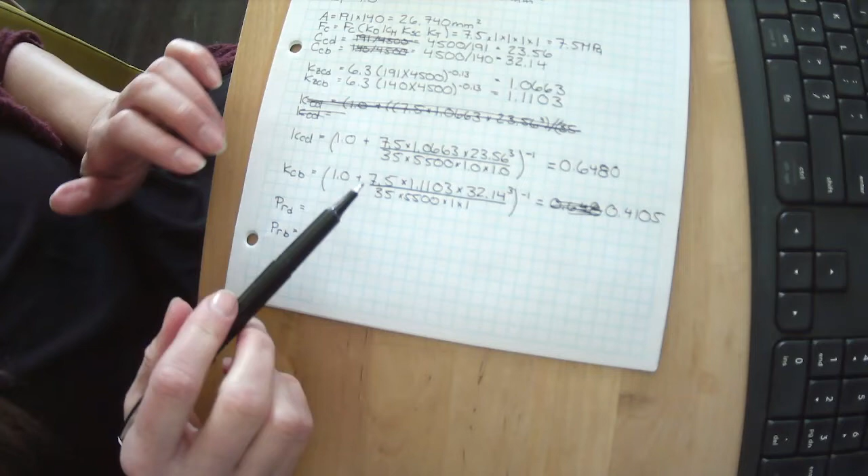All right, so our overall calculation for PR is our reduction factor, which is 0.8, times our FC, our capital FC, which is 7.5, times our area, which we calculated is 26,740, times our size factor, which is 1.0663, times our buckling factor, which is 0.6480. And then in our weak axis, our reduction factor is the same, our strength's the same, our area is the same, our size factor is different, and our slenderness factor is different, or our buckling factor.

So let's take a look at what our PR is. So see, it's not obvious. This is lower, but this is higher. So it's worth calculating both.

Times 7.5 times 26,740 times 1.0663 times 0.648. We get, I'm going to divide it, this is in newtons, I'm going to divide it by 1,000 right now to get it in kilonewtons. We get 110.9 kilonewtons.

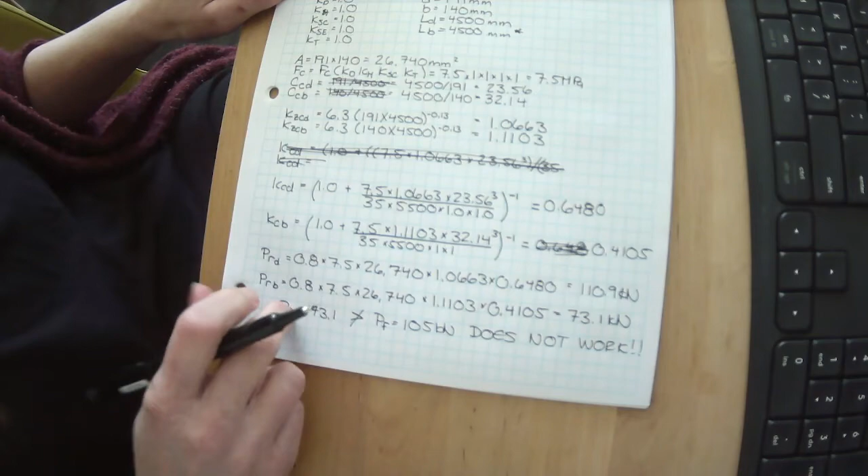Now, they said if it didn't work, they had a feeling this might be the case, but let's brace that axis halfway up. So for our strong axes, everything stays the same. Nothing changes in our strong axes. We've already calculated it, so that we've already got. We want to figure out what PRB is if we change it up a little bit. So for PRB, or our capacity in the weak axis for tendency to buckle, B still equals 140 millimeters.

But LB, it said we're going to brace it halfway up. So we've got a shorter unbraced length now. So what happens if we've got an unbraced length? Well, our size factor changes.

So we can calculate, well, actually a few things change. Our CCB changes, our KZCB changes, and our KCB changes, which means our PRB changes. I know, that was a lot. I know it sounds ridiculous when I just say all of those letters. Well, let's calculate our CCB.

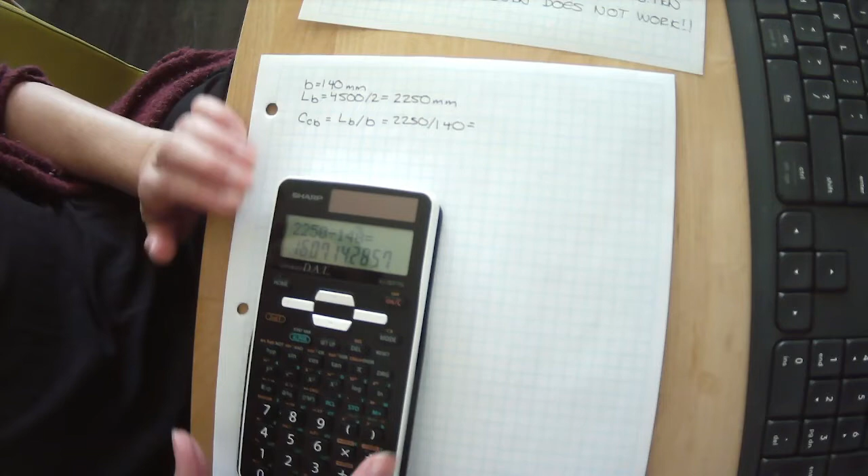CCB is our LB divided by our B, or 2,250 divided by 140. We get 16.07.

KZCB is 6.3 times B times LB to the minus 0.13, or 6.3 times our 140 times 2,250 to the minus 0.13. So 6.3 times 140 times 2,250 to the power of minus 0.13. We get 1.215. It is less than 1.3, so we're good. We can use that value.

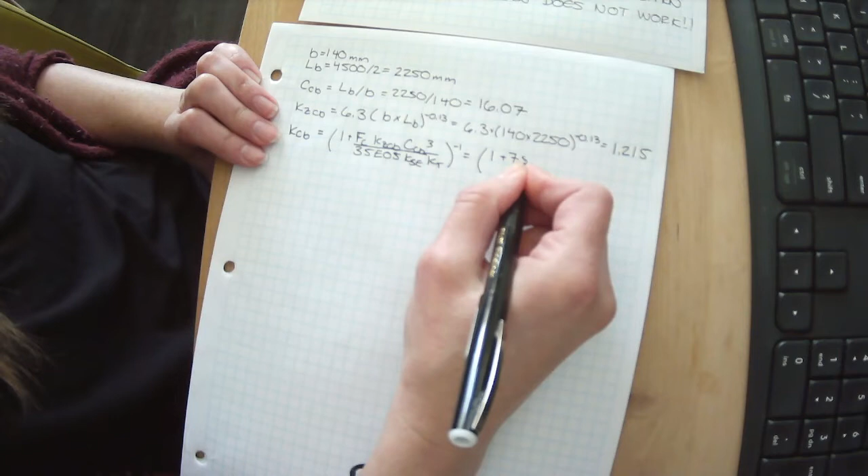And now we can calculate our buckling factor of KCB, which is our 1 plus capital FC times our KZCB times our CCB cubed divided by 35 E05 KSE KT all to the minus 1. So for us that is 1 plus 7.5 times our new KZC is 1.215 times our CCB cubed is 16.07 cubed divided by 35 times 5,500 times 1 times 1. All of that is to the minus 1.

We can plug this in and we get bracket 1 plus bracket 7.5 times 1.215 times 16.07 cubed divided by 35 times 5500 to the power of minus 1, and we get a buckling factor of 0.8358.

Okay, so we've got a buckling factor now. That means we can calculate PRB, so our weak axis capacity, and we know that that is the reduction factor times capital FC times A times our size factor times our buckling factor. So we've got 0.8 times 7.5 times our area of 26,740 times 1.215 times 0.8358. Just squeaking it in there on the page.

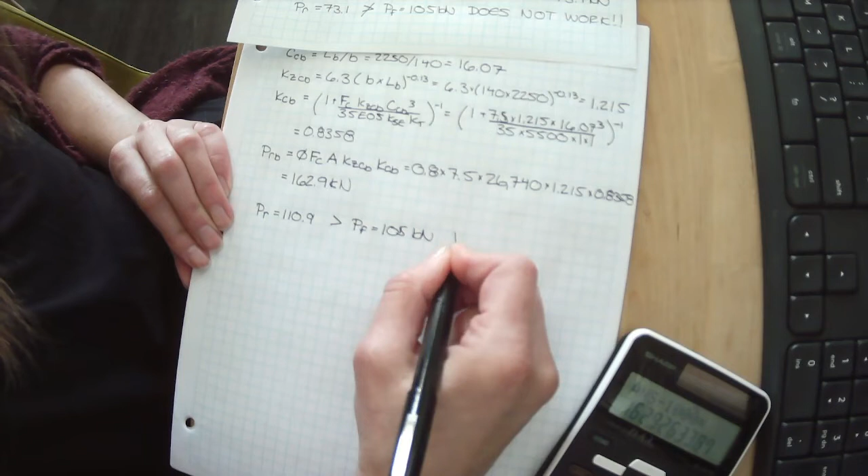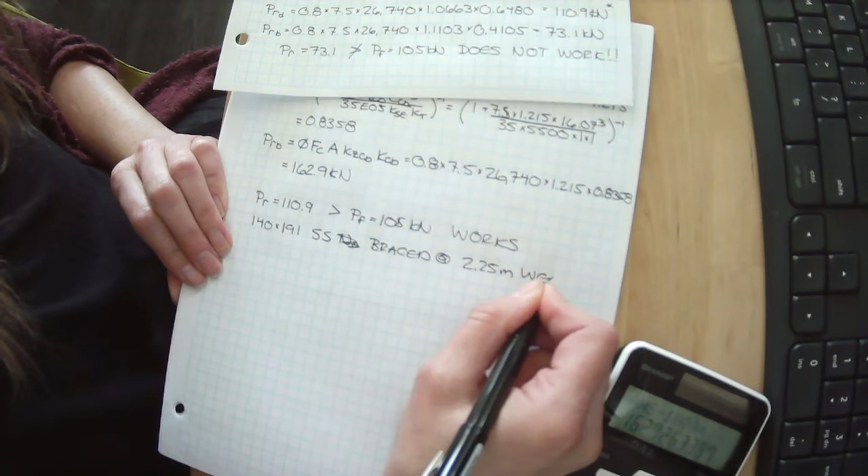Our strong axis capacity is still 110.9. So now PR equals 110.9. It is greater than PF equals 105 kilonewtons. Works. So we need a 140 by 191 select structural post, braced at 2.25 meters in the weak axis. So we actually have to do something to this to make sure it doesn't fail. We have to brace it at some height to make sure it doesn't fail.

Okay, so that was 2 examples that we've gone through. You haven't done one with a system factor, but I can tell you if you come up with one that is a stud, you get to use case 2 system factor.

All right, let's do another example. Oh, my tummy's growling. I apologize.

Okay, does this look familiar? We've touched on it the past 2 weeks we've done work. So we're designing a steel canopy. They gave us the dimensions. They gave us the roofing assembly. They told us the location and the climatic loading. Well,

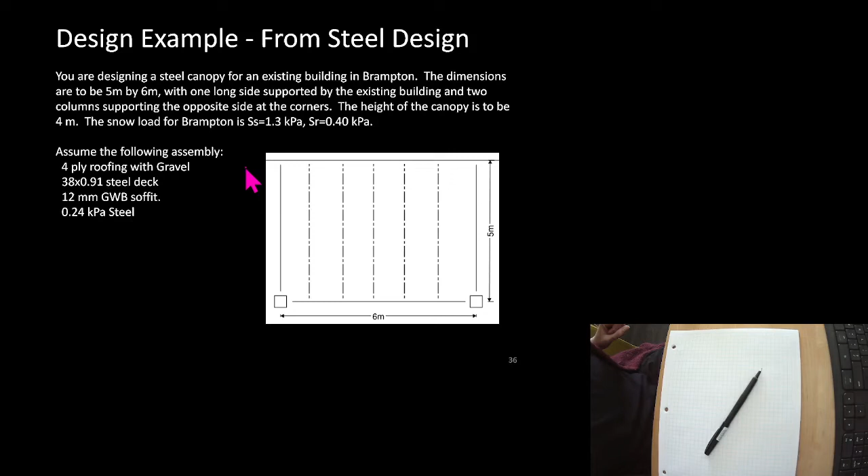Let's consider the steel canopy we designed in previous lectures. The contractor has suggested a cost savings by substituting wood members in lieu of steel. They're proposing the following: for the column, a 140 by 140 Douglas fir number 2, and for the beam, a 140 by 343 Douglas fir number 1. We don't know how to do that yet, so we'll worry about that next week.

We want to assess whether the proposal is structurally adequate. Recall that this would be considered to be a wet service, it's outside. Now, luckily, we already did a bunch of work. We, in Lecture 5 and Lecture 6, figured out what CF was, what MF was, what VF was, and what our serviceability loads are. So we're good for a huge portion of the work. We now just need to figure out what PR or CR is, and then next week we'll take care of this part. Okay.

So we want to know, does a 140 by 140 Douglas fir number 2 work? It's a post, and do you remember that its height was 4 meters? Now, what do you think, is this the unbraced length? Yeah, it's a post outside. There's nothing bracing it, there's nothing connecting it anywhere that's going to stop it from buckling. So it looks like it's going to be the same in both directions. It's a 140 by 140, so it looks like it is the exact same in both directions for height and dimension, which means we really only have to go through the calculations once. We know what its setup is.

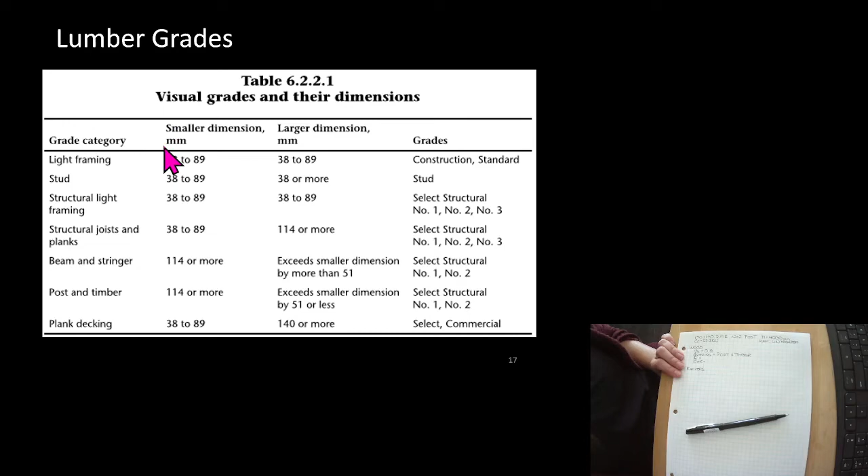So post and timber isn't table A. We're not using table B. It isn't table C. It looks like it is table D. So table D, we can get our FC, or our compression stress parallel to grain, and our modulus of elasticity. And for columns, we like E05.

Well, they told us it was Douglas fir, and it's number 2. So look at this, 7.5. It was the same value as it happened to be before. Most of these are different, so what a coincidence that these happen to be both 7.5. And it is just that, a complete coincidence.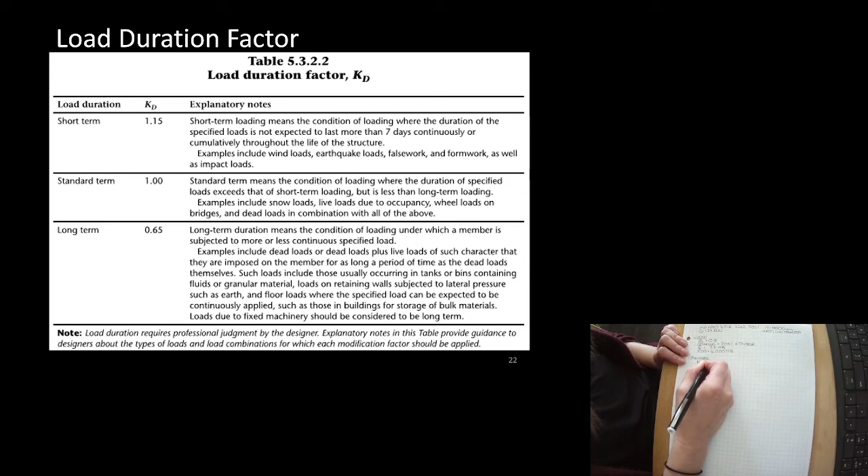So we've got 7.5 for a Douglas fir number 2 post, and our E is 6,000, or our E05 is 6,000 MPa. Let's take a look at our factors. Seems like KD is 1. They haven't told us that there's anything fancy going on here. It's standard, so KD is 1.

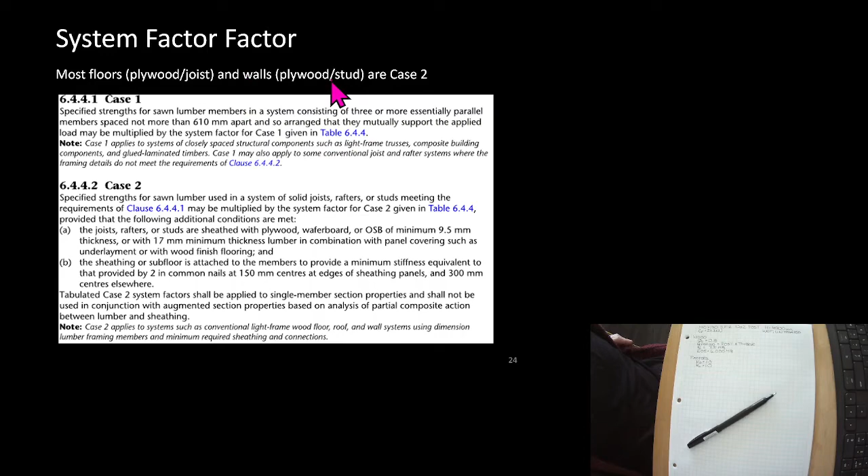All right, it's not part of a system, so our KH is 1. If it was a stud, it would be part of a system. Walls, plywoods, and studs - a wall, which is a stud with plywood on it, is a case 2.

Service condition factor. Well, they did say it's outside, and we know that means it should be wet. So it's a wet service condition for sawn lumber, which is what we've got.

Okay, if it's 89 millimeters or less... well, we don't have that. Both of our dimensions, so this is for the least dimension, both of our dimensions are 140. So we're over 89 millimeters, and we want to know what the factor is for compression parallel to grain. It looks like our KSC is 0.91.

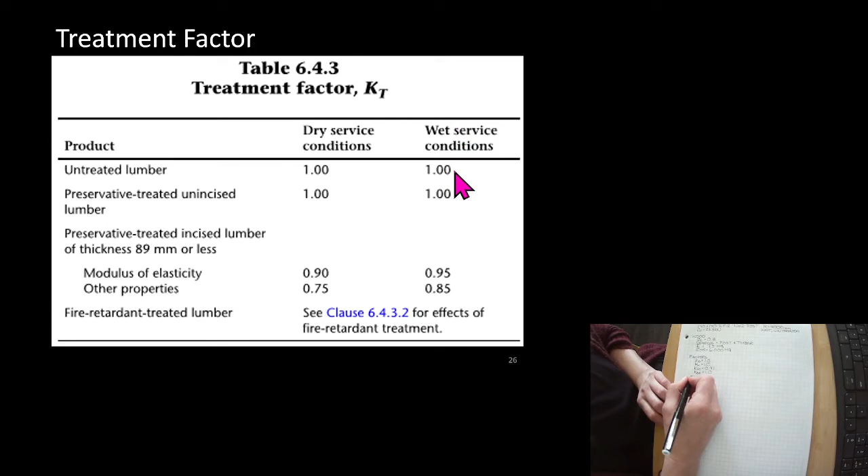Modulus of elasticity factor is 1, so there's no change in the modulus of elasticity though. What's our next factor? Treatment factor. It's a wet service condition, but they told us it was untreated. So KT is also 1.

Size factor - we know for a column, KZ is a formula, so we can't really do much with that right now. And we know that we have this equation that we need to solve. So we can write out some stuff about our member as well here.

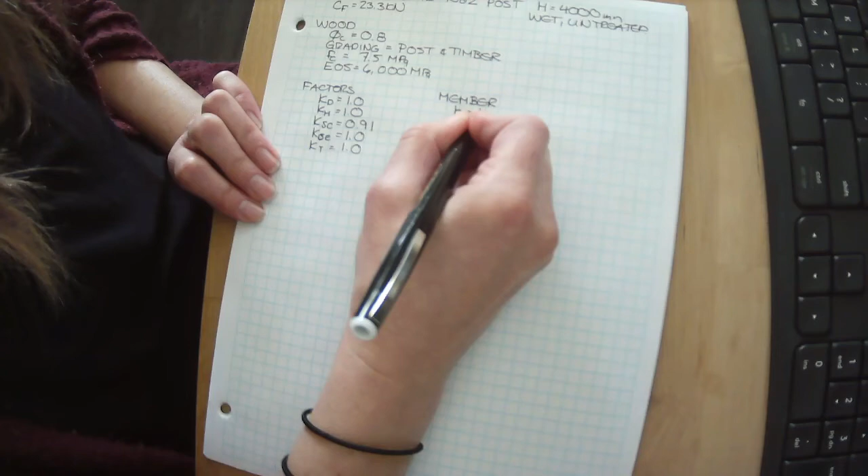So let's write out some stuff about our member. B equals 140 and D equals 140. LB equals 4,000 millimeters - look at me not writing units. And LD also equals 4,000 millimeters. So it looks like this one's the exact same in both directions, so we don't really need to worry about directionality so much.

All right, we know that PR equals our reduction factor times our capital FC times A times KZC times our KC. Well, we've calculated that. We need to figure out what FC is, which is lowercase fc times our KD times our KH times our KSC times our KT.

So for us right now, that is 7.5 times 1 times 1 times 0.91 times 1. So we actually have a reduction in the maximum stress we'll let this see because it's outside. So 7.5 times 0.91 equals 6.825 MPa. So this column can take less load because it's outside.

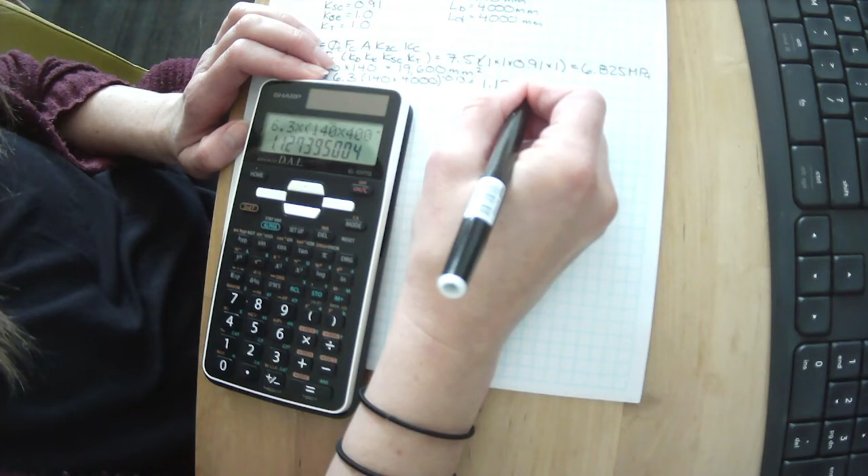KZC is the next thing we need to calculate. We know it's the same in both directions here. So we know it's 6.3 times our 140 times 4,000 to the minus 0.13, because it's going to be the same in both directions - B and D are the same, and LB and LD are the same. So 6.3 times 140 times 4,000 to the power of minus 0.13, and we get 1.1274. It's less than 1.3, so we can go for it. That seems to be the right one.

Okay, the next thing we calculate is KC, but we know KC needs our CC value. And CC is either LD divided by D or LB divided by B, or 4,000 divided by 140, because it's the same in both directions for this one. So 4,000 divided by 140 gives us 28.57.

Which means we can calculate our KC, because KC is 1 plus our capital FC times KZC times CC cubed divided by 35 E05 KSE KT, to the minus 1. Okay, we have 1 plus 6.825, because remember, we had to reduce that lowercase fc, times our KZC, which we calculated is 1.1274, times our CC cubed, or 28.57 cubed, divided by 35 times 6,000. KSE is 1 and KT is 1. And all of that is to the minus 1.

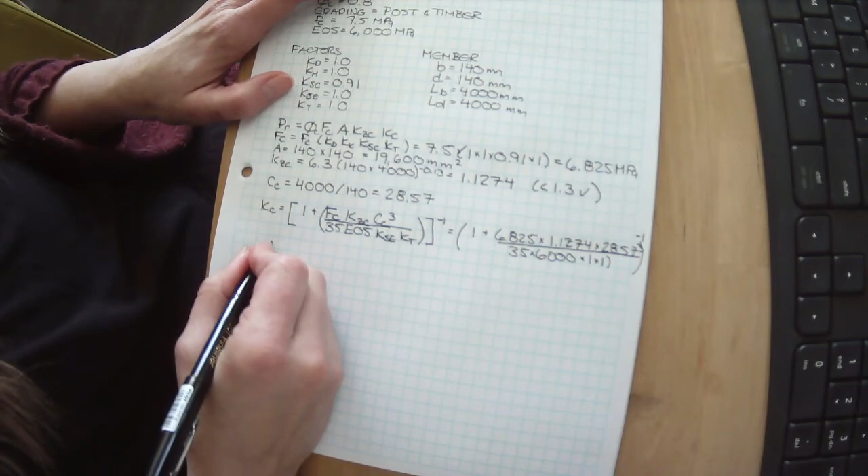Okay, let's plug that into our calculator so we can get our buckling factor. We have 1 plus 6.825 times 1.1274 times 28.57 cubed - I haven't forgotten that yet, I'm pretty proud of myself, screwed up a bunch of other things but not that - divided by 35 times 6,000, to the power of minus 1. And we get a buckling factor of 0.539.

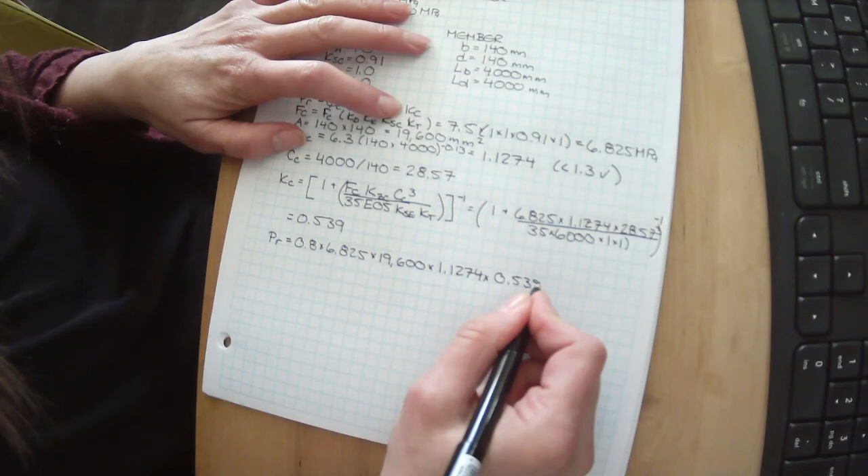So now we can calculate what PR is. PR is 0.8 times 6.825 times 19,600 times our KZC, which is 1.1274, times our KC, our buckling factor, 0.539. This comes out in newtons, so I'll divide it by 1,000 right away. 0.8 times 6.825 times 19,600 times 1.1274 times 0.539 equals, dividing by 1,000, we get 65 kilonewtons. So we've calculated it, but they told us to make sure it actually works.

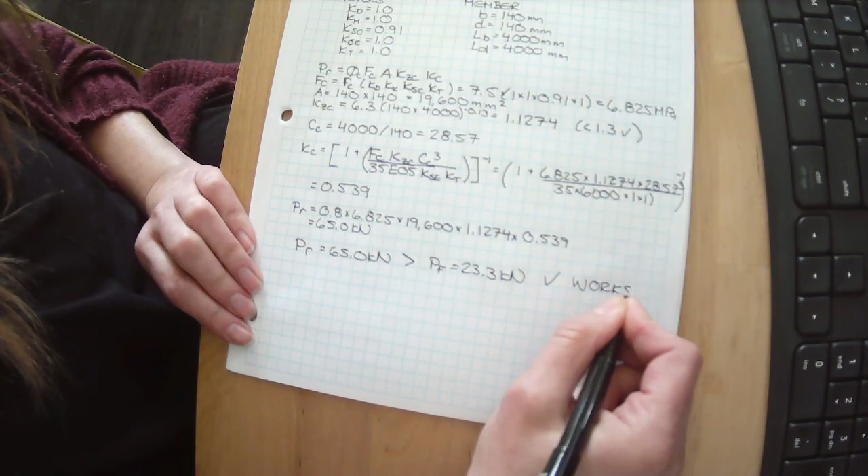We want to see that PR equals 65 kilonewtons is greater than PF equals 23.3 kilonewtons. It works. Let's just verify that against those tables I gave you.

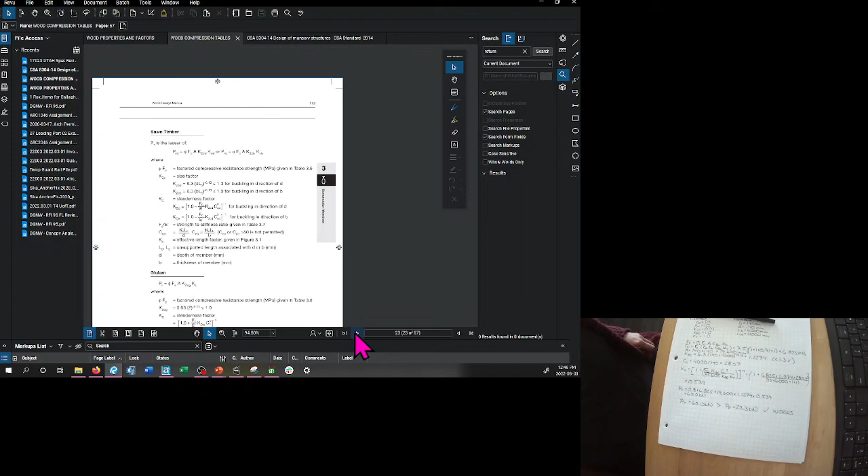Okay, so we did this calculation manually. Let's take a look at what happens when we look at the tables here. Okay, so these are sawn lumber. Let's get to columns. So these are some bigger columns here. Sometimes I have to hunt around. Ooh, look at this. Oh no, this is Douglas fir number 1 sawn timbers. So this isn't the right page.

Douglas fir larch number 2 sawn timbers, square timbers of 140 by 140, which is what we have, for a height of 4 meters, look at this. It calculated 68.4. We calculated 65.

Did we do something wrong? No. This is assuming, if you look down here, standard term load, dry service conditions, no fire retardant. Well, we didn't have a dry service condition, we had a wet service condition. So our value ended up being just a little bit lower.

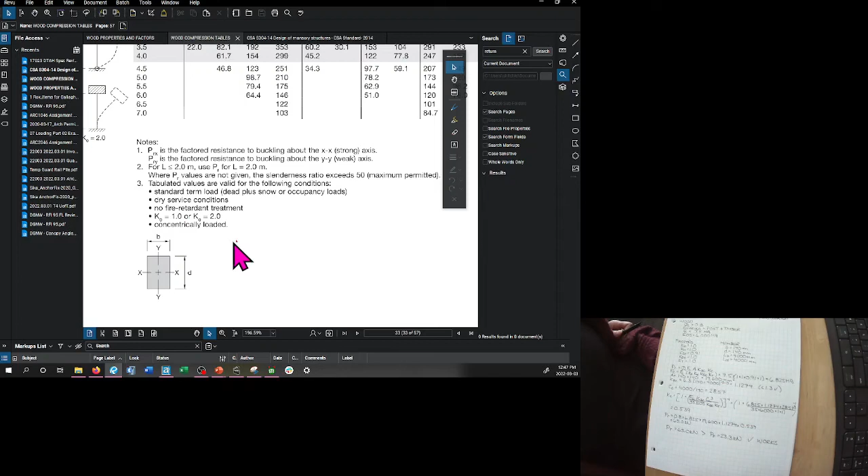So these tables are great, but as soon as we deviate from the norm, they're slightly less helpful. They give us a good idea on if we're close or not. Like if we had calculated 5, not 65, we would know maybe we had done something wrong. Or if we calculated 1,000, we would have a pretty good idea we made a mistake somewhere. But we know it should be slightly less than the 68.4 this gives us as the answer.

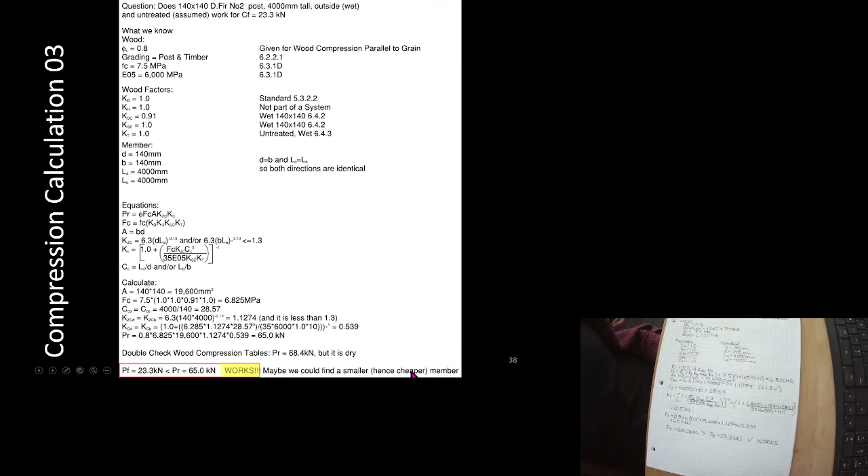Okay, so here it is all worked out. Maybe we could find a smaller or cheaper member. So it looks like these are the smallest member, and number 2 is what we use. Doesn't seem like we're gonna get anything smaller there.

So let's just take a look at the comparison from what we did last week. There wasn't a smaller wood section available, there just wasn't a smaller one. Our steel, we calculated we had a 64 by 64 by 3.2 as the smallest section. Now this steel was 5.82 kilograms per meter. Our 140 by 140 Douglas fir is going to be closer to about 11 kilograms per meter.

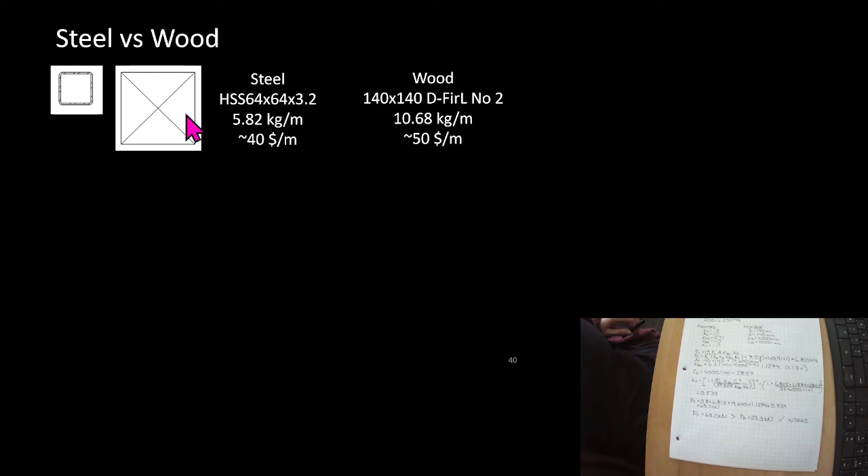But maybe aesthetics means this wants to be the answer. So we don't really know which one's going to be chosen. The contractor suggested this as a cost savings. Maybe that was true 5 years ago, maybe they can get a discount, but it seems within the realm of reasonable. Maybe the architect looks at it and says this is fantastic, there's wood columns inside the arena, we want to match the aesthetic, let's go with the wood. So this was an option worth checking.

Okay, so what did we learn today? What have we learned? All right, so wood strength depends on the wood species. So if you're doing something in cedar, it's not going to be as strong. Wood is organic and has all kinds of things that impact the strength. Wood column design includes compression buckling. Wood comes in many forms, including engineered products. Those are the main things you need to know going forward.

What we're going to be talking about that you have to know to do your assignment, your project, and your exam is how to choose the wood grade. Actually, you don't really need to know how to do that for your project. Know and determine wood strength factors, how to calculate PR for columns, posts, or studs, how to look up PR for available sections, and how to identify if the column works. That just means write that nice little note that PR is greater than, or isn't greater than, PF. And so now we have wood column solutions. We know how to do a steel column, and now we know how to do a wood column, which means we can start to compare the relative merits of the two systems.